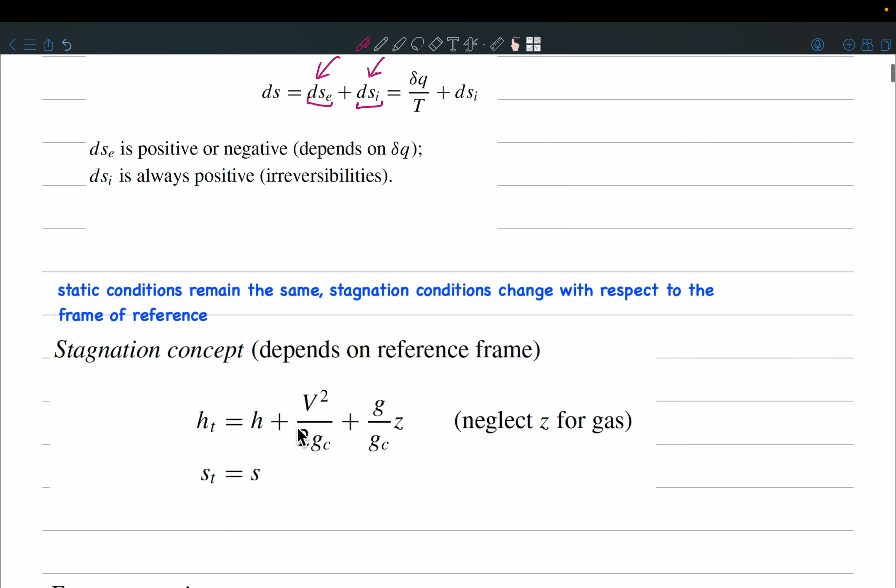Okay, so the next concept that we saw was the stagnation concept. Do you remember how the stagnation state is achieved? Can one of you please answer?

Adiabatically is enough. Yeah, and reversibly also, right? So it has to be a reversible and adiabatic process from which, starting from a static condition, if I use a reversible adiabatic process and go to what condition? What does stagnation condition mean? What is the Mach number at that stagnation condition? Zero. So you have to basically become stagnant, you have to go to Mach 0. And this is the reference state which we use to solve isentropic flows.

A very important point was that whatever frame of reference you use, the static conditions are going to remain the same, but the stagnation conditions will change depending on what frame of reference you are using. Because the stagnation enthalpy is equal to the static enthalpy plus V square by 2. Just ignore this, it's a normalization constant used in the textbook I was referring. So depending on what frame of reference you have, your stagnation enthalpy is going to change. Is this clear?

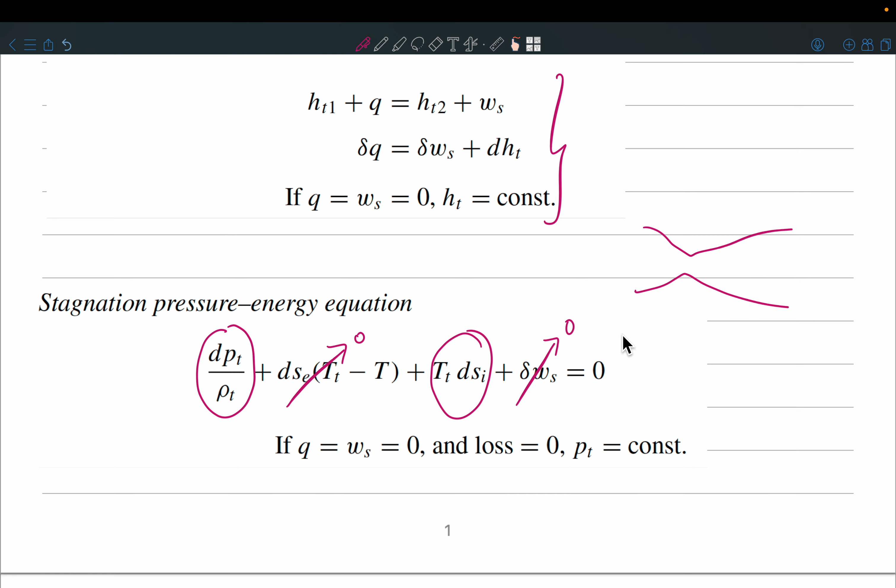Yeah, anyone can answer please. Yeah, in isentropic processes. So one example is a CD nozzle operating at first or third critical. I hope you remember the first and third critical points.

Which of these options is correct, or none of them are correct? Option A is wrong. What about option B? B is correct. So static pressure, or any static quantity for that matter, does not change whatever is your frame of reference.

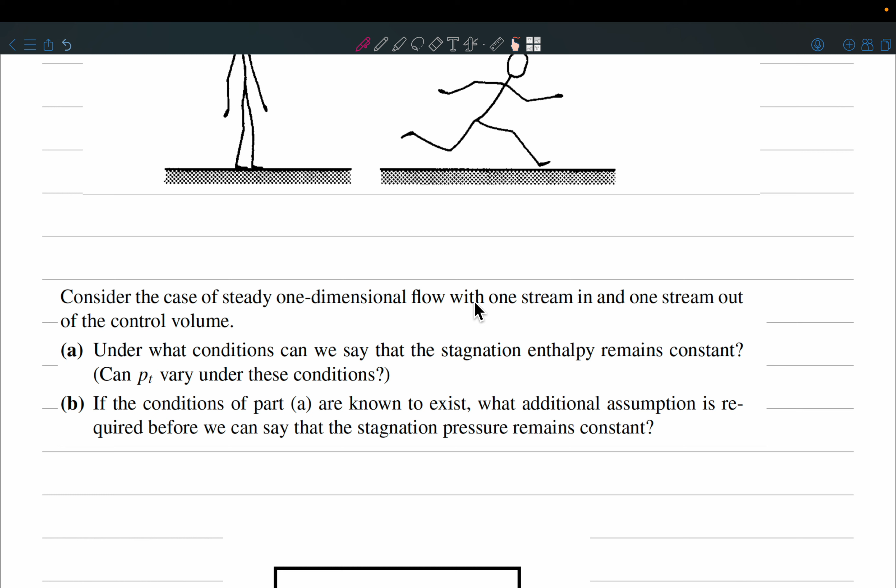So here's another question. Consider the case of a steady one-dimensional flow with one stream in and one stream out of the control volume. Under what conditions can we say that the stagnation enthalpy remains constant? We just saw this above, the stagnation enthalpy, the energy equation. So when will the stagnation enthalpy remain the same?

Q is 0, no heat added, and work also 0. And we also saw that the stagnation pressure can actually change under these conditions, and the only case where stagnation pressure will not change is when, in addition to Q equal to 0 and W equal to 0, we also need losses equal to 0.

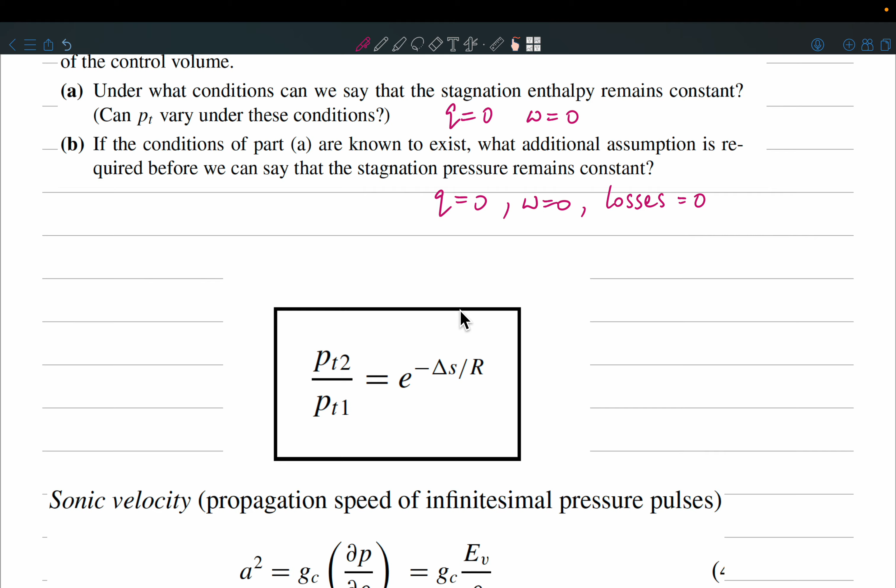And then we also saw this equation. Do you remember the relation between the stagnation pressures and entropy? What this equation says is that if there is a change in entropy, say due to losses, like we saw in the very first equation, ds equals dse plus dsi, and if dse is 0 and dsi is always positive, then delta s is positive. So e power minus delta s by r is going to be less than 1, which implies that if there are losses in the system, PT2 should be less than PT1. That means stagnation pressure will drop whenever there are losses.

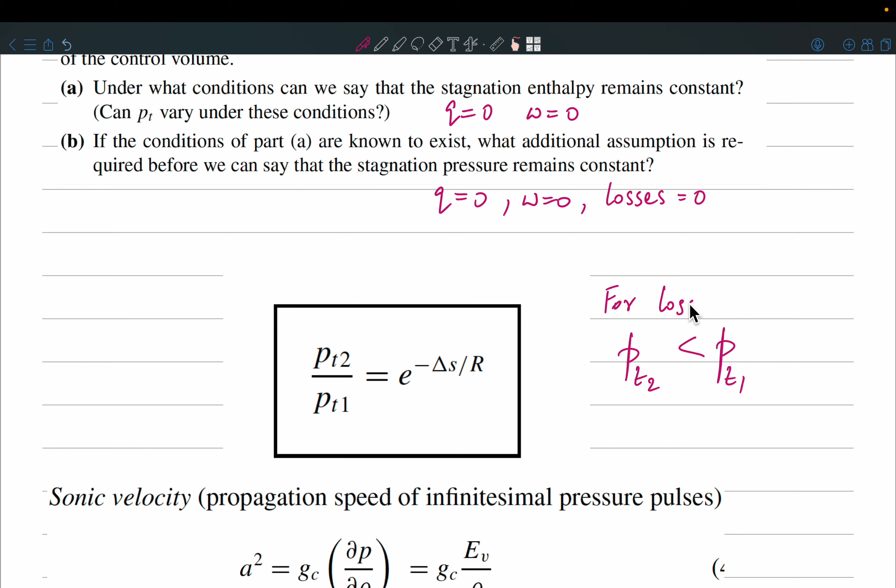And you must be familiar with these equations. How is the sonic velocity defined, and what is the Mach angle, Mach number? We have also seen these special relations for perfect gases. And when are these equations valid? Are they valid for any flow? Are these only isentropic relations? Can they be valid only in isentropic flows?

Now, give me a formula for the stagnation enthalpy or stagnation temperature in terms of the static quantity and the Mach number. So does the flow have to be essentially isentropic? Anyone? Just give me a yes or no. It's okay to be wrong.

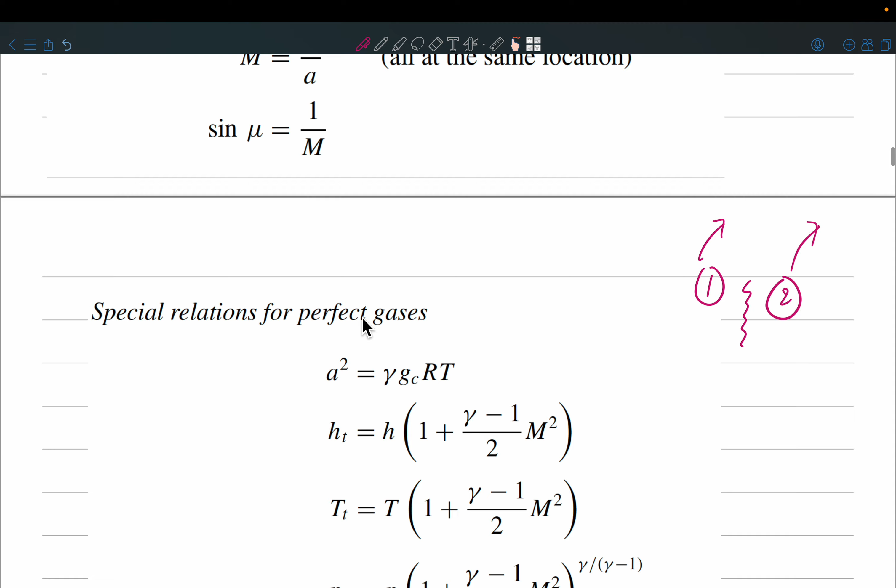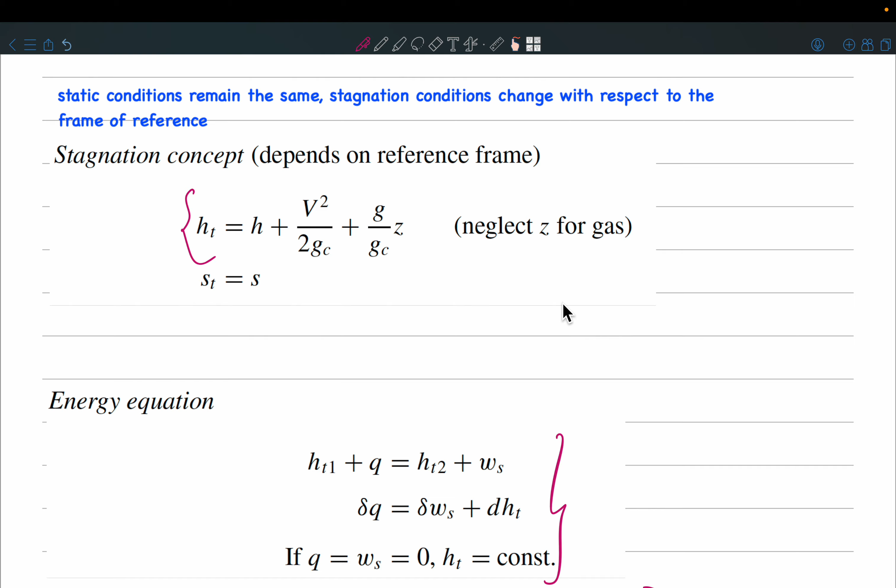So how did we get this equation? Let's go back. We derived the energy equation, and in the energy equation we said, okay, put Q equal to 0, W equal to 0. That gives me that the stagnation enthalpy is constant. But right now I am not applying any conservation equation like the energy equation. I am just defining a new state, which is the stagnation concept. Remember, stagnation enthalpy is static enthalpy plus V square by 2. If you rewrite this, you just rearrange and get this equation I've shown you here. So stagnation enthalpy can be related to the static quantity and the Mach number. I can use this in any flow.

What was the stagnation reference state? You start from some point, okay, so this is the H-S diagram, and this was your original state.

So let's say this is state 1, and from here you go through an isentropic, reversible adiabatic process, to a state 1s, or as written here, T. This I can do for any state 1. Let's say I have a normal shock, and after the normal shock I have some other condition 2. Then from 2 I can also go through an isentropic process and reach point 2T, and they will be at the same enthalpy line.

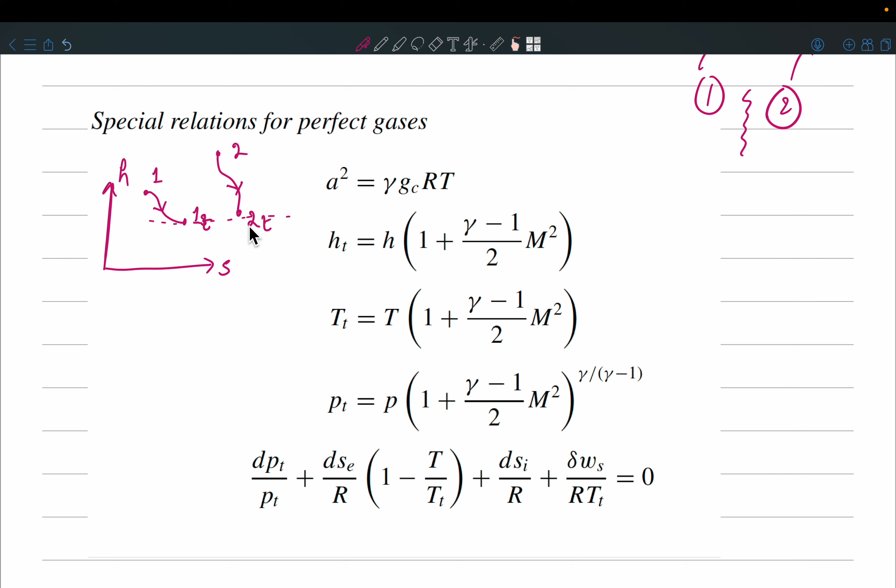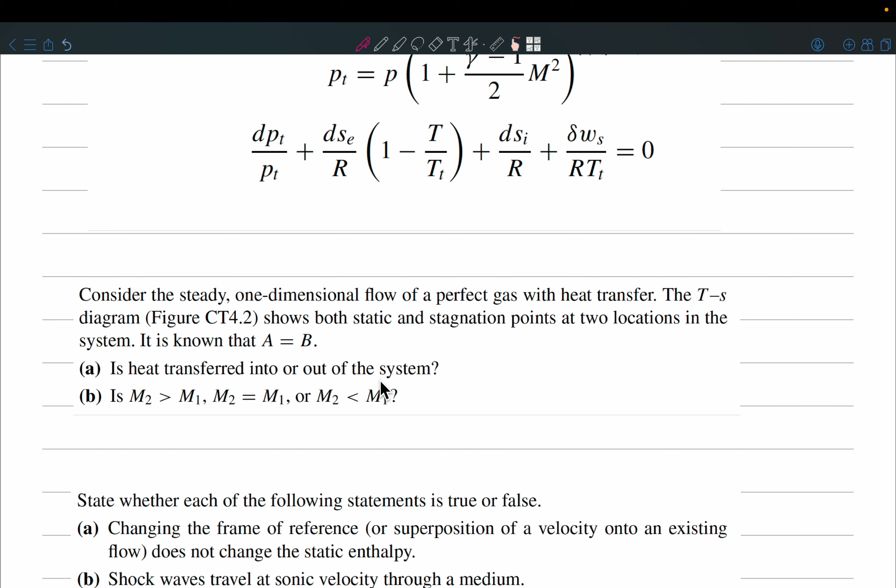Okay, so let us see this question. Consider a steady one-dimensional flow for a perfect gas. I don't have the figure here, but the TS diagram shows both static and stagnation points at 2 locations in the system.

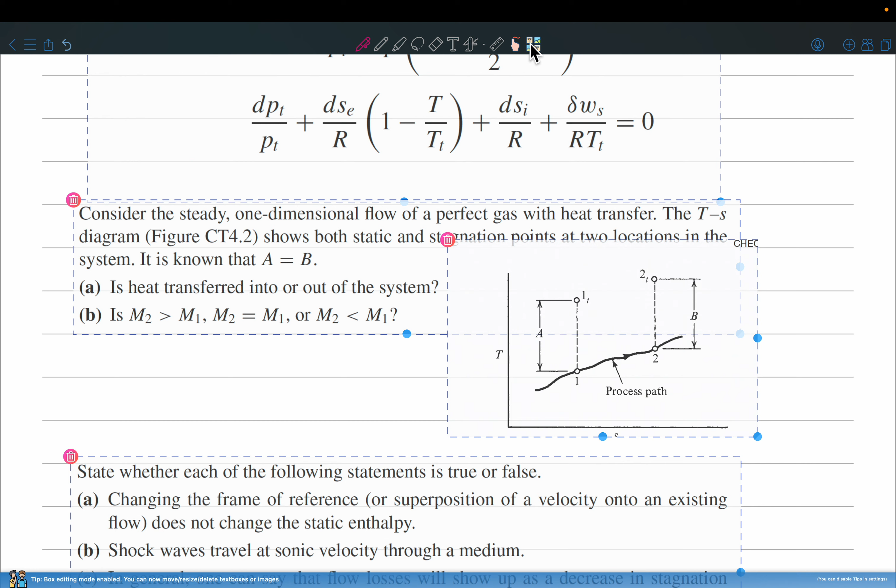So, is the heat transferred into or out of the system? How do you say this? Please answer. So you can see there is this, yes, into the system. How do you say so? Right, so the temperature has increased.

If you compare point 2 and point 1, are you comparing the static points or the stagnation points? Yeah, you should compare the stagnation points. That's very important. So here the answer is into. You should ideally compare these lines, not 1 and 2. Can you tell me why?

Another way of seeing this is, you have this case ht2 plus w. Now it is possible that heat is actually being removed but work is being done on the system, which also might change the temperature states in a different way. And we also saw Rayleigh flow where the velocity was changing - if you remember, in Rayleigh flow there is a state of maximum entropy and a state of maximum enthalpy. Between the maximum enthalpy and maximum entropy state, the temperature actually reduces despite adding heat to the system. So you can only see the stagnation quantities and infer whether the heat is being transferred into or out of the system.

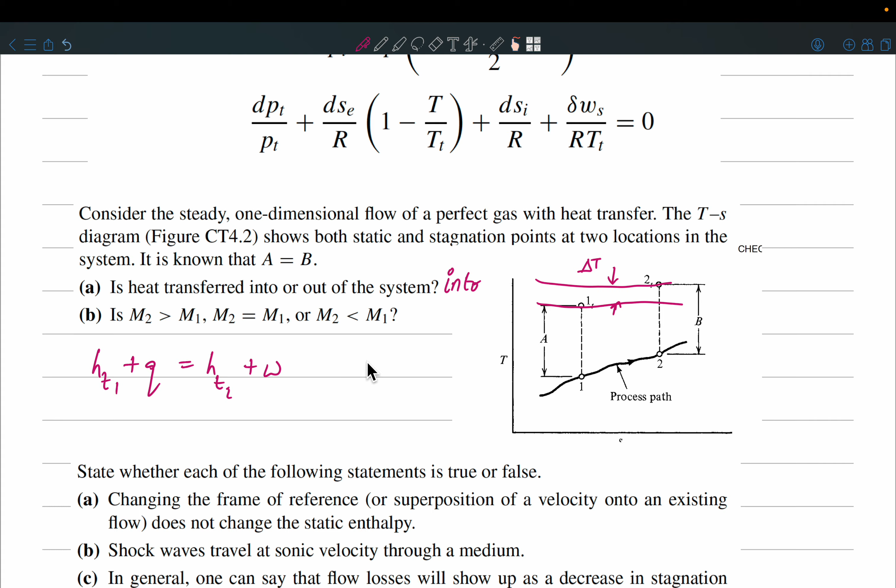Okay, so what about question B? Is M2 greater than M1, equal to, or less than M1? Why? Just think again. See, the static points given to you - for both these static conditions, this rise A and this rise B is given to be the same. How can the Mach number be the same?

Okay, you said the right thing, but think a little more. What is Mach number? What did you say? Because A is equal to B, what does that imply?

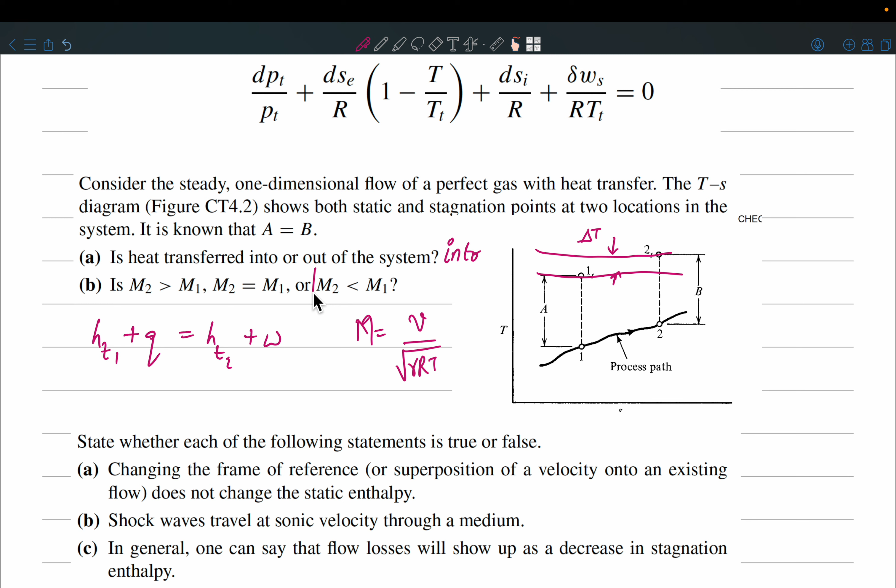Yes, m2 will be lesser than m1 because t2 is more than t1. Right? So velocity is same but not the Mach number. So be careful. Alright, okay.

Okay, so let's move on to this next set of questions. You have to state whether these questions are true or false. So, changing the frame of reference does not change the static enthalpy. Is that right? True or false? Why? Okay, we just saw that stagnation enthalpy depends on the frame of reference, not the static enthalpy.

See, whether I'm moving in a train or whether I'm sitting at my home, the temperature that I feel is going to be the same, isn't it? Yeah, so this is true.

What about part B question? Shock waves travel at sonic velocity through a medium. What are shock waves? The normal shocks that we have seen, right? And we have also solved questions on moving shock waves. So do they travel necessarily at sonic velocity through a medium?

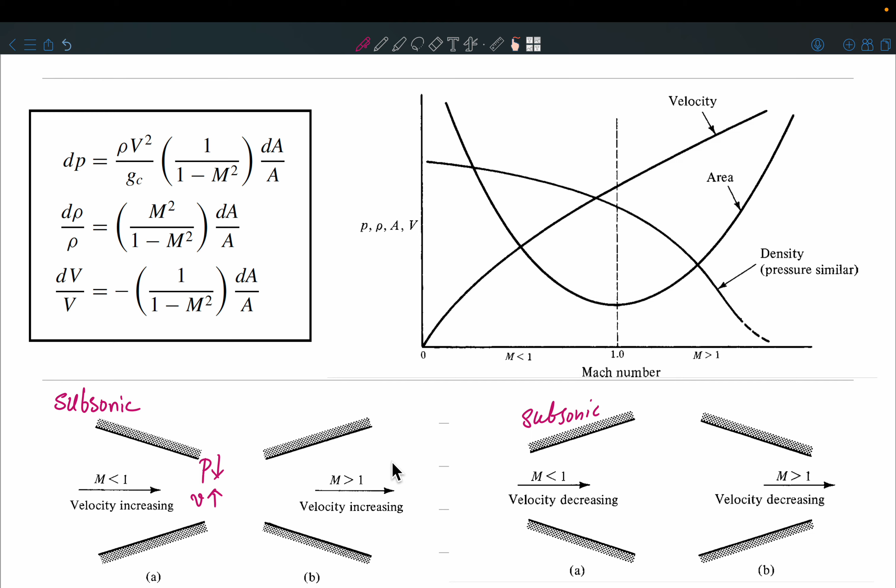So what is this going to be, a nozzle or a diffuser? Nozzle, right. And when the area is increasing for subsonic flow, then it is a diffuser, right? Okay, and for supersonic flow, it's the opposite. So when the area is increasing, you can see that velocity is going to increase. Right. So we have the nozzles and diffusers for subsonic and supersonic flow.

Okay, now there is another reference state that we have studied, which is called the star reference state. And how did we achieve the star reference state? It is similar to the stagnation state, because you start from whatever point you are at, and then you achieve a state by a reversible isentropic imaginary process, and you achieve Mach equal to 1. In stagnation, again it's reversible isentropic, but you achieve Mach equal to 0. And here it's reversible isentropic, but you achieve Mach equal to 1. So I hope you understand what is a star reference state.

Alright, now if I start from two different static conditions, will the star reference state be same or different? Different, yeah, say it confidently.

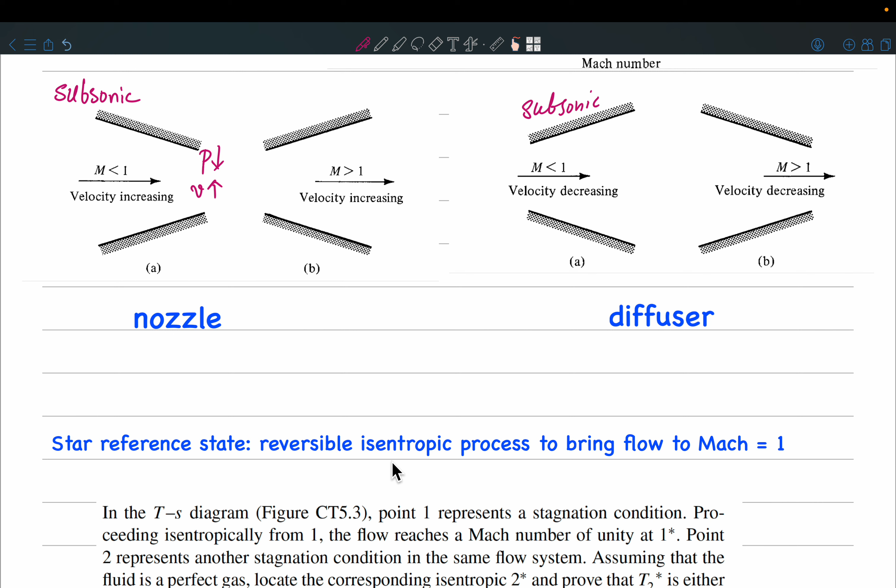So this is important. We'll come back to this when we see Rayleigh and Fanno flow. You will see that for Rayleigh and Fanno flow, the way you define the star reference state, it is going to be the same no matter what initial condition you start with.

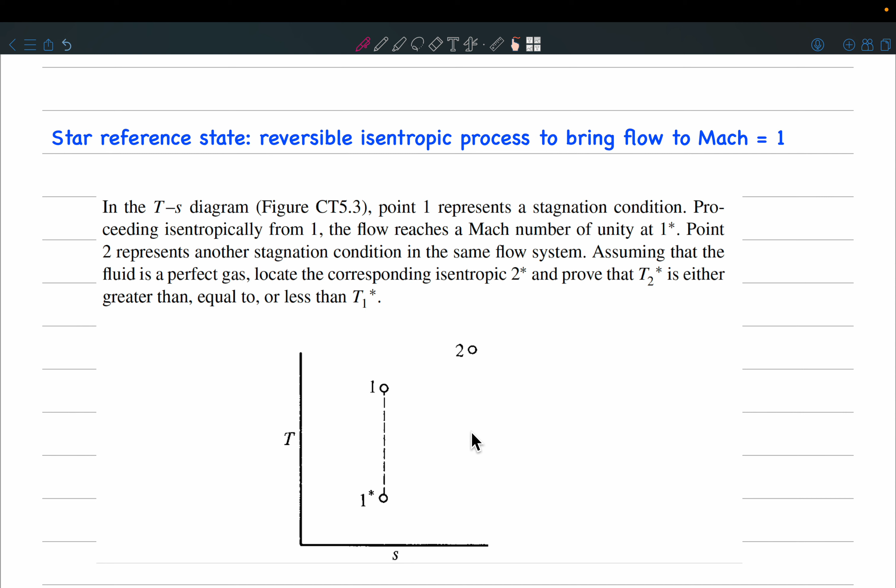Okay, so in this question, in the TS diagram which is given, point 1 represents a stagnation condition. Proceeding isentropically from 1, the flow reaches a Mach number of unity at 1 star. Point 2 represents another stagnation condition in the same flow system. Now assuming that the fluid is a perfect gas, you have to locate the corresponding isentropic 2 star and also prove that T2 star is either greater than, equal to, or less than T1 star. You have to tell me whether T2 star I should mark it above this line or below or at the same point.

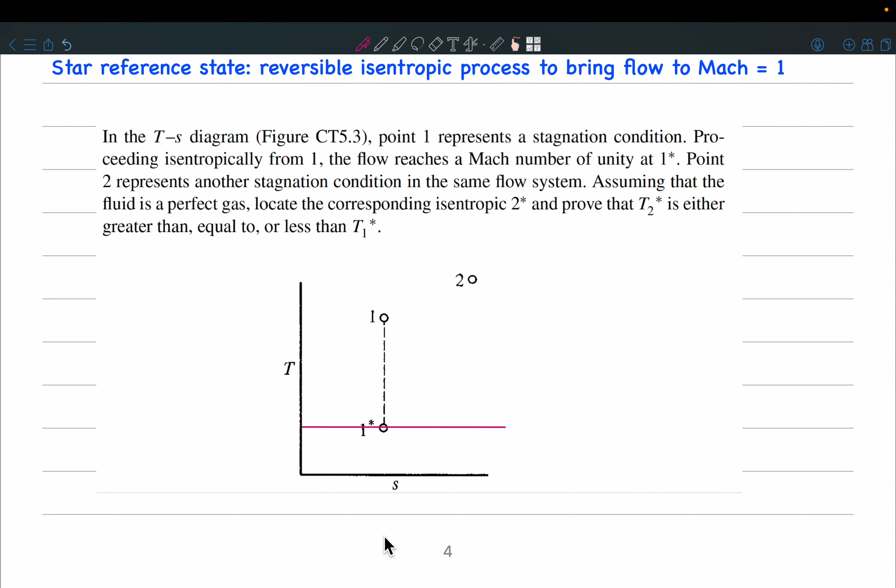So how do you do this question? Did you understand the question? So we just now discussed, if we start at two different stagnation states and then we achieve the star reference state, you said that the star reference states are going to be different, right? So we know that T2 star is definitely not equal to T1 star. So this we have already established. So now the question is whether it's greater than or less than. Why? How?

Okay, first of all, you are saying greater than. So let's say it's here, right? So should I mark 2 star over here, here, or here? A, B, or C? Right, yeah, so it has to be isentropic, so it has to be a straight line like this, right? So definitely it's B. So now the question is, you said T2 star should be more than T1 star. Why?

Why? Yeah, go on. Who answered it? Just tell me what is your reasoning. Sorry, I did not get you. Can you repeat? Stagnation temperature is?

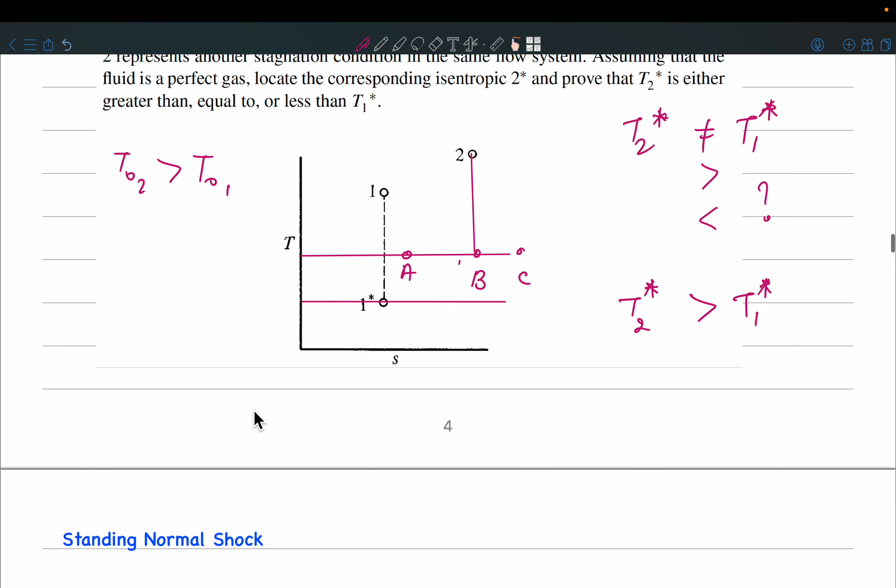You're saying that T02 is greater than T01, and that is why T2 star is greater than T1 star. Yeah, right. Yeah, that is correct. Okay. Any questions about this, or should I move on?

Okay, yeah, thanks. So we saw the conditions for standing normal shock, and these are the equations we have derived. This is from the continuity equation, then energy equation, and the momentum equation. So what do we understand? What are the quantities that are conserved across a normal shock?

What are the... T naught, H naught, is okay, essentially the same thing, fine. And what else? Yeah, so stagnation temperature or stagnation enthalpy, H naught, remains the same.

What about P naught? P naught decreases, okay, so P naught doesn't remain the same. And what else remains the same across a normal shock? You can see the equations here.

Yeah, go on. So how do you derive the continuity equation? You say that the mass flow rate is going to remain the same, isn't it? Yeah, so the mass flow rate remains the same, mass conservation, and then you have this P plus rho V square. This quantity remains the same. Okay.

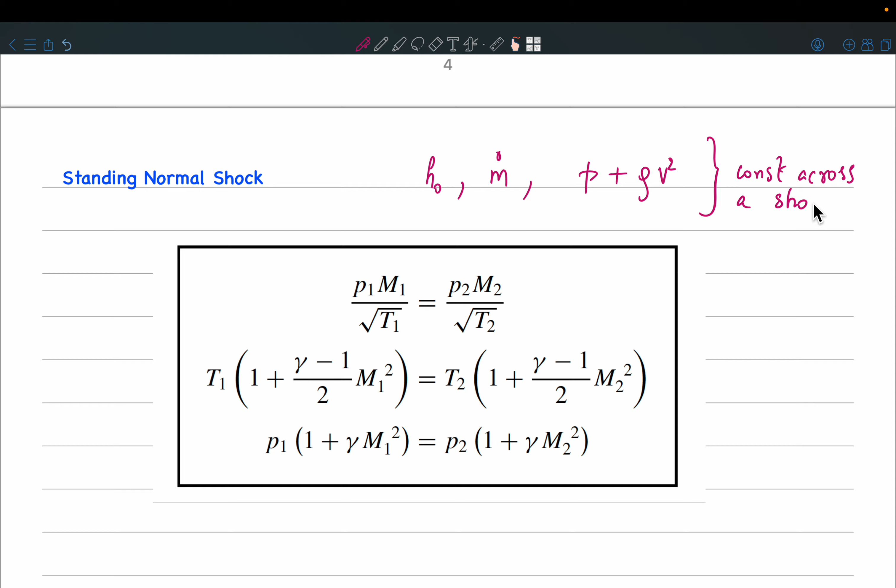Then we also saw CD nozzles, and this is the diagram that we've discussed several times. So can you tell me what is the Venturi regime? What happens in the Venturi regime? And if a CD nozzle is operating in the Venturi regime, which gas tables would you use, or which equations would you use?

Come on, we've solved questions with this. Anyone answers? Yeah, it's a subsonic regime. So the flow is going to remain subsonic in the converging and the diverging part of the nozzle. And which equations would you use, or which gas table would you refer to?

Isentropic gas tables, right? And what happens at the first critical? What happens in the nozzle? In the first critical situation, will a shock be formed? So will you use the shock tables to solve the first critical, or the isentropic table?

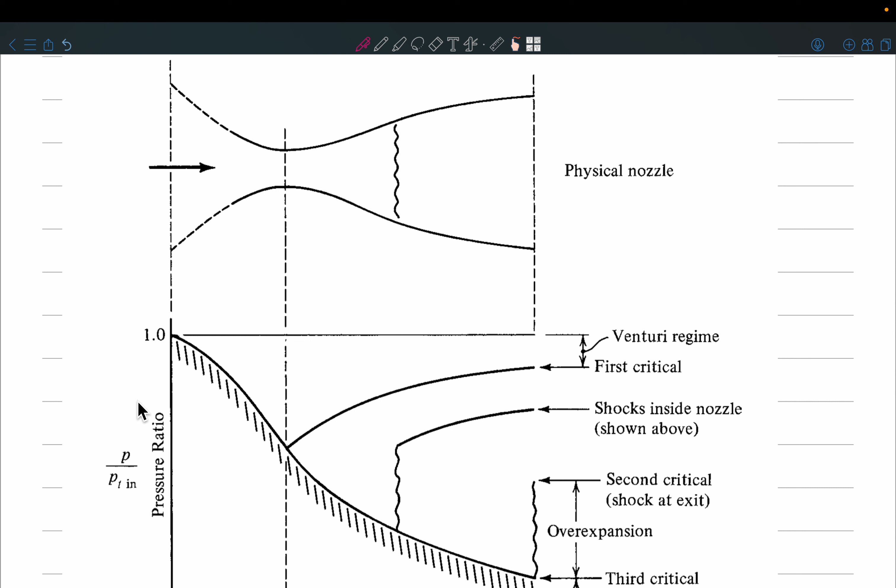See, on the left hand side, you can see what you've plotted is the pressure ratio, right? And what this pressure ratio tells you is, in a physical system, what you can change is either you can change the pressure here, which is the chamber pressure, or you can change the pressure here at the receiver end.

Okay, now let us say I'm using this receiver pressure and I have fixed my pressure ratio at this point. Then I have ensured that the flow is going to be subsonic throughout. As I keep decreasing the pressure, the flow conditions are going to change.

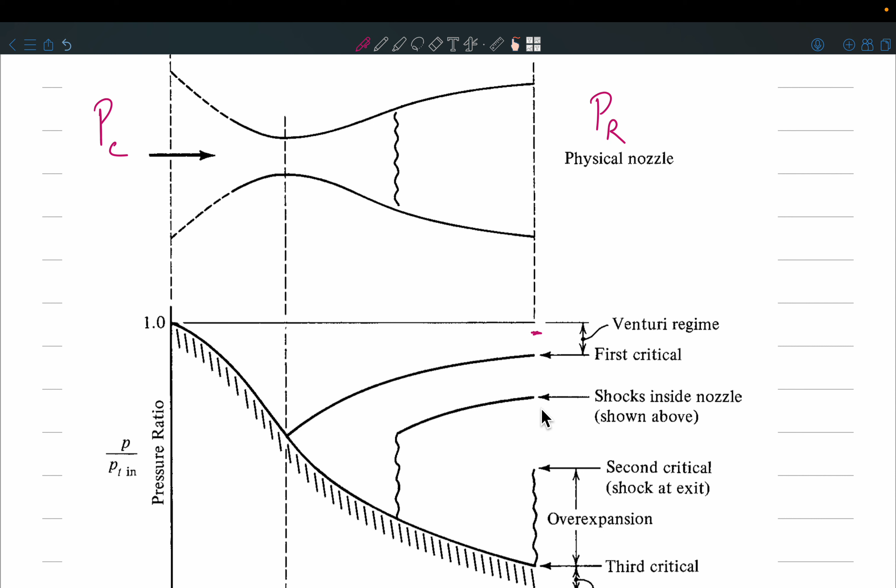Why is this happening? Why does a shock even occur? Or why do we get supersonic flow? Because the flow is forced to behave in a certain manner depending on what pressures you have applied across the CD nozzle, right? So now when you decrease the receiver pressure starting from this point, you cannot immediately come to the third critical. If you are eventually decreasing, you will first get shocks at different locations. Is this concept clear?

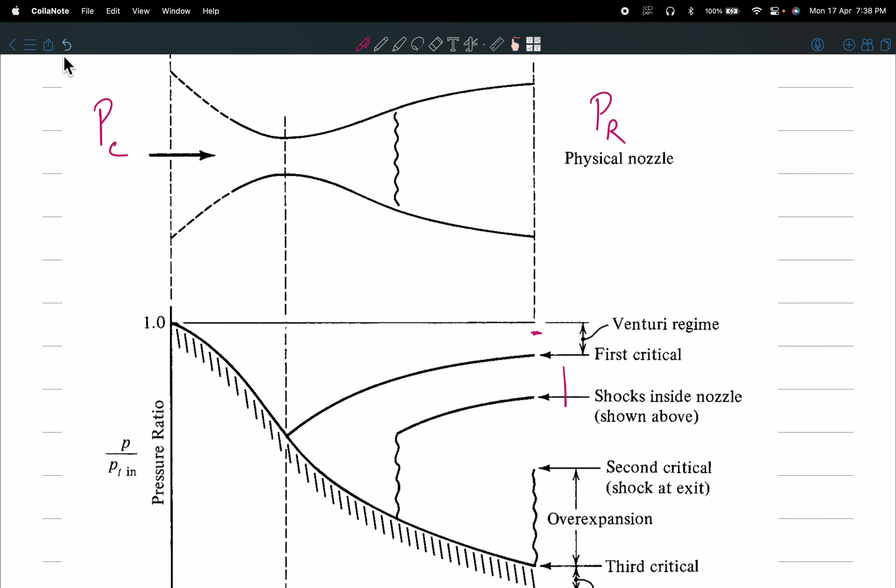Alright, so that is why you should remember, see, first you started with the Venturi regime. Anyways, the flow was subsonic in the converging section. And then you went beyond the first critical, which is where you start getting shocks. But the flow is still subsonic in the converging section. Okay, so don't get confused about that.

Alright, and can you tell me what is the second critical condition? So we have the first critical condition where the flow remains subsonic throughout the CD nozzle. Third critical, where we have supersonic flow in the diverging section, and what is most important is that it is isentropic.

Okay, now can you describe the second critical? It's written here, shock at exit, but can you describe more? What can I say about the flow inside the CD nozzle? Just before the shock.

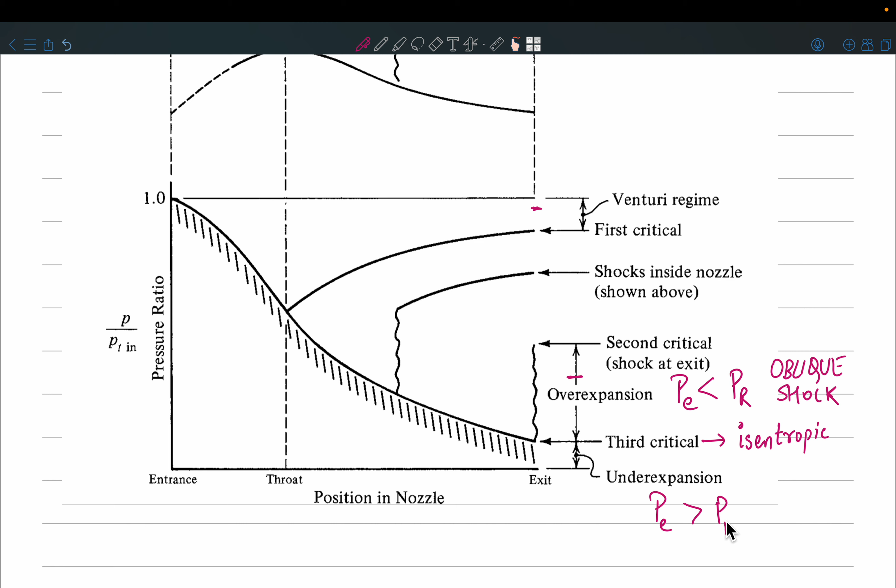So I think the most important takeaway point is that these pressures, or the pressure ratio, is the control parameter. So practically, if you have to create any of these flows, you should know how to control the pressures.

Okay, so let's answer these questions. You have to fill in the following blanks with increases, decreases, or remains constant. So what happens across a standing normal shock for the temperature?

Sorry? No, what is written? Temperature. It increases.

Okay, what about stagnation pressure? Alright, yeah. And velocity? Right. And density? Right, because it's a compression phenomenon.

Okay, so there's a question here, but I think it's very easy for you to solve. Let's consider a converging diverging nozzle with an area ratio of 3, and you have to assume that operation is happening with a perfect gas, gamma 1.4.

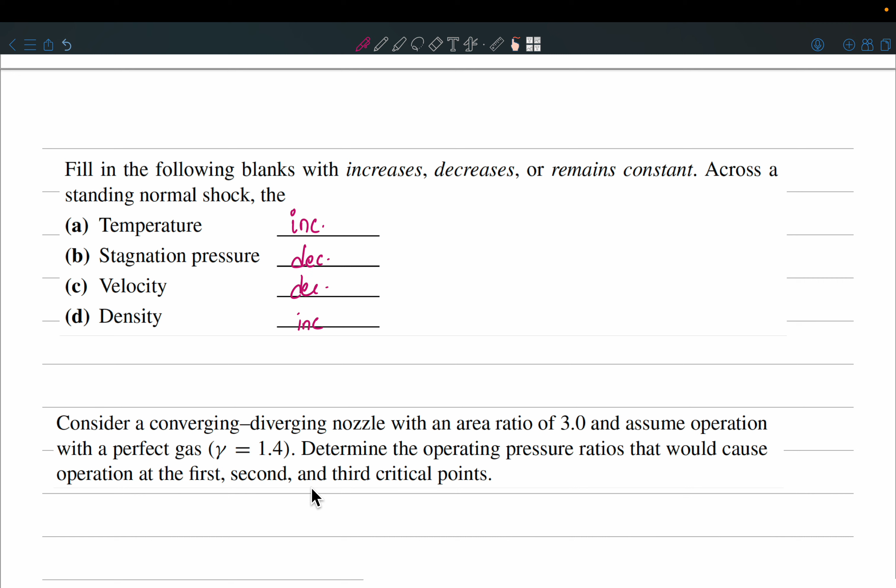Determine the pressure ratios that would cause operation at the first, second and third critical points. So we have discussed the first, second and third critical points, and like I said, the pressure ratio determines which state is achieved in the CD nozzle, right? So for this given area ratio, without giving the answer, how will you approach this problem? How will you tell me the pressure ratio for the first critical point?

Anyone? Actually, we have solved one of this type of question in the tutorials as well.

Okay, are you all still there? Yeah, please tell me, how will you find the pressure ratio corresponding to the first critical point? No idea?

Okay, someone was trying to speak something. Alright, we have a lot more things to go through, so please answer quickly. And also the static pressure ratio. But anyways, how do you do it?

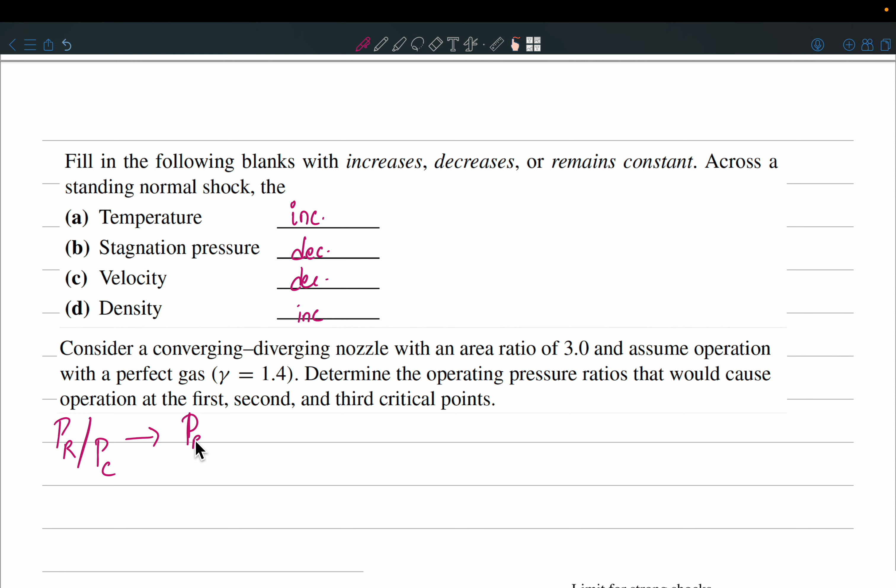So in your case, it is the P receiver by P naught. Give me the reciprocal.

Yeah, that is right. So for the first critical, it's 0.97. And what about the third critical?

And how did you do this? Did you use the gas tables or did you use a formula? Isentropic table, yeah.

So corresponding to this area ratio, you must have got a subsonic Mach number, and corresponding to that, you have this pressure ratio. Similarly, you will have a supersonic Mach number, and corresponding to that, what is the pressure ratio?

In the isentropic table, what is not given? Okay, did you find the Mach number? That is the subsonic Mach number. What about the supersonic Mach number?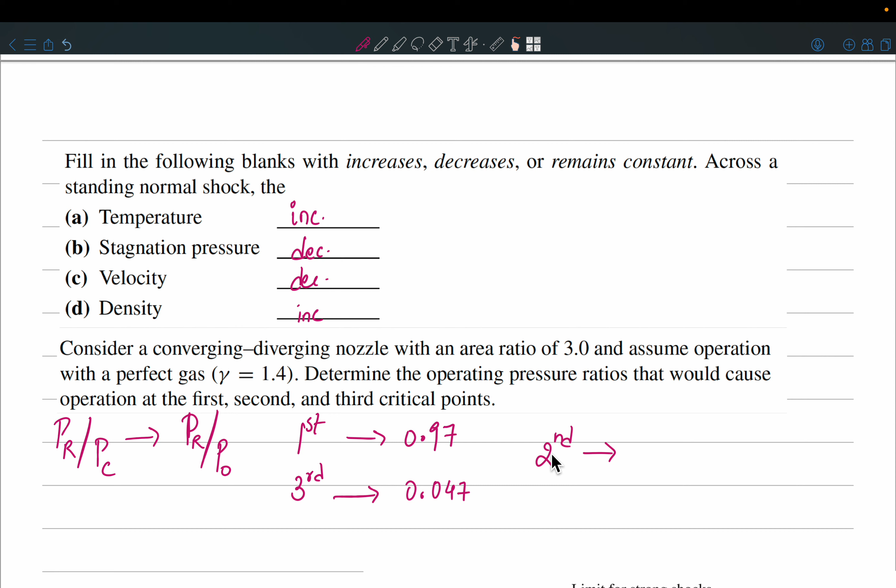Okay, so this is why it was important to know what happens inside the CD nozzle just before the shock.

So you just now found what is the Mach number for the third critical? Can you tell me? It was 2.65. Yeah, okay, so this is the Mach number corresponding to the third critical.

Now what is happening at second critical? So everything is exactly the same as third critical. So up till this point, just before the shock, you should have the Mach number whatever you found, 2.65, right? So I can call this M1, and you also have the pressure value, the pressure ratio up till here.

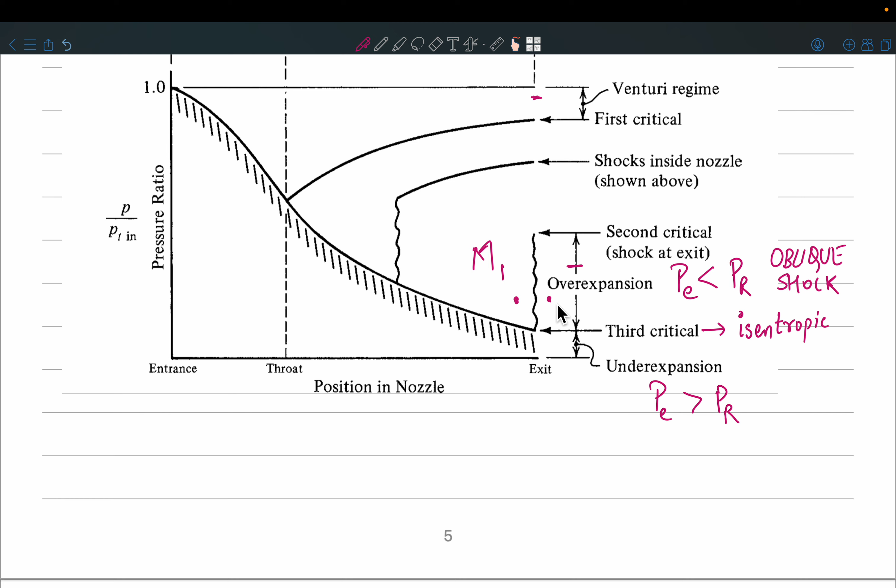And after this, you have to use the normal shock table to find the pressure ratio across the shock, and then you can tell me the pressure ratio between the receiver and the chamber. So how do you do this?

You will have to give me the receiver pressure ratio by the chamber pressure, which is going to be the receiver pressure P2 by P1 multiplied by P1 by P0, and P1 by P0 you just now found is 0.047. Did you understand what I'm doing?

Yeah, so can you tell me now the final pressure ratio? You know the Mach number, use the normal shock table, find P2 by P1, multiply it by this value and tell me PR by PC.

0.37. Just check your calculation again. What is P2 by P1?

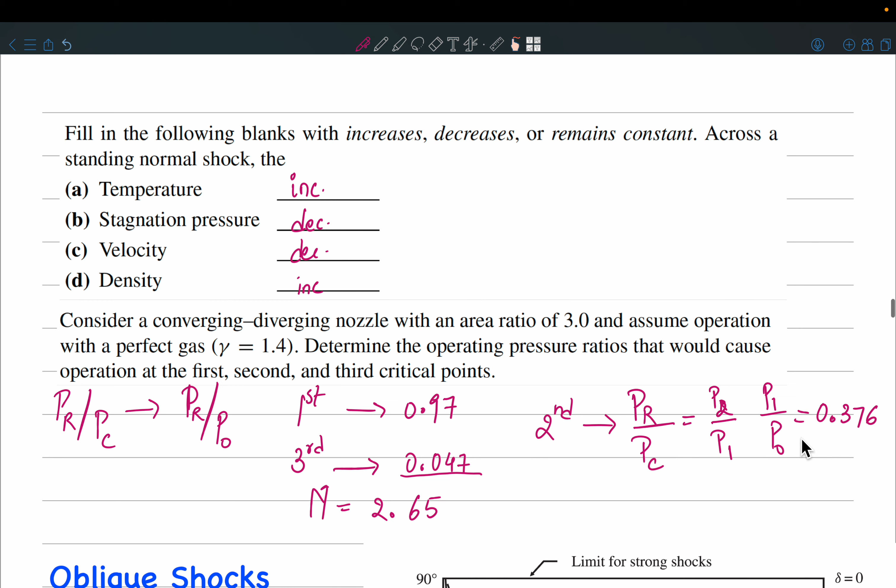Okay, so let's move on to oblique shocks. So in oblique shocks, we've seen whenever the flow is forced to turn into itself - here you are forcing the flow to actually turn its direction. It was moving horizontal, but now it has to deviate by an angle delta. So a shock is going to get created, an oblique shock.

Okay, and the shock angle is what the shock makes with the horizontal, right? Or not the horizontal - it is the angle that the shock makes with the direction of the initial flow.

Okay, so here you can see this chart between the shock angle and the entering Mach number, and I hope you are familiar with the fact that there can be two shocks created. One can be a weak shock, one can be a strong shock corresponding to each Mach number.

So is this known, or do I explain this in detail? Any questions? Okay, yeah, this is covered in theory.

So now my question to you is, let's say a deviation angle is given - let's say this delta equal to constant, this particular line is chosen. Okay, and this is the Mach number that I'm looking at. So both these shocks are possible, strong and weak. Which one will actually occur? How do you know that? Why can't the strong one occur?

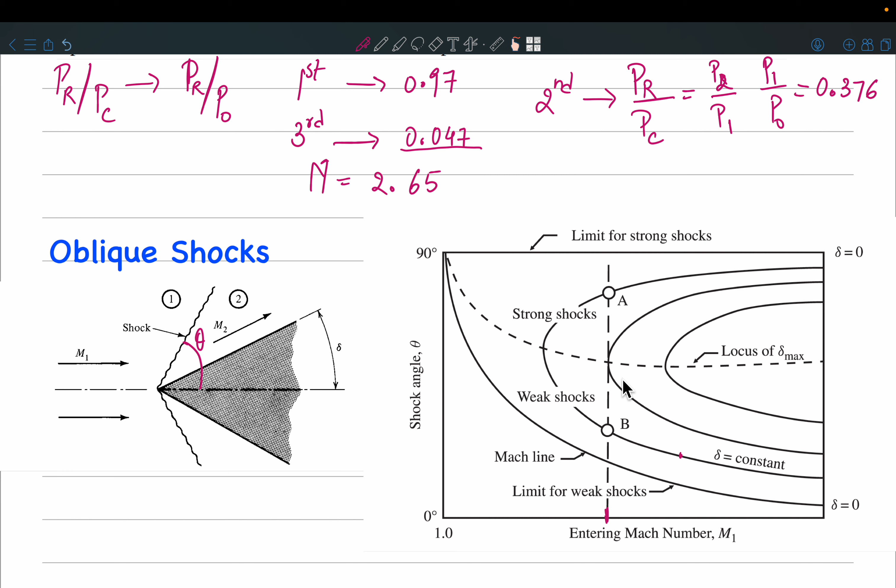Yeah, so we can say that most of the time, most frequently, weak shocks will occur, right? But sometimes strong shocks can occur depending on the boundary conditions.

Yeah, you were saying something? Right, but I don't exactly know in the question what were the conditions given.

Okay, okay, so naturally, yeah, it is weak shocks. Okay, maybe it was a problem in the question. Alright, but you know the concept, right? So it's okay.

So, like you said, it depends on the boundary conditions whether the strong shock will occur or the weak shock, but most frequently we will get weak shocks. Boundary condition, like one of your friends suggested, that if we have to get a strong shock, you have to either change the pressure or the pressure ratios across the shock, right?

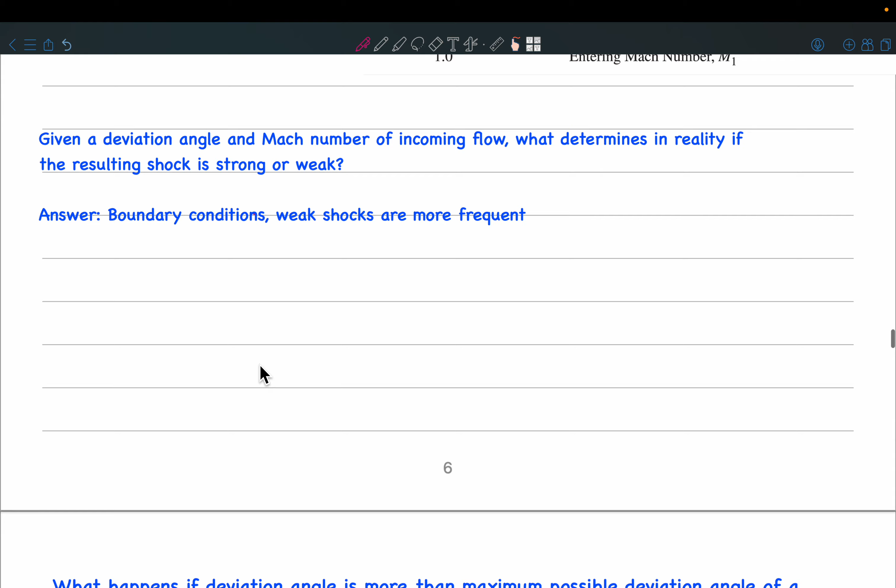Can you repeat? Your voice is breaking. Yeah. Yeah.

Let's apply this concept of strong shock, weak shock directly to a re-entry vehicle. Firstly, if you have seen the design of a re-entry vehicle, it's not sharp edged. So you don't expect an oblique shock, you expect a bow shock.

Okay, and now to specifically answer your question about a detached bow shock, whether it's strong or weak, you tell me, what about a bow shock? Is it strong or weak?

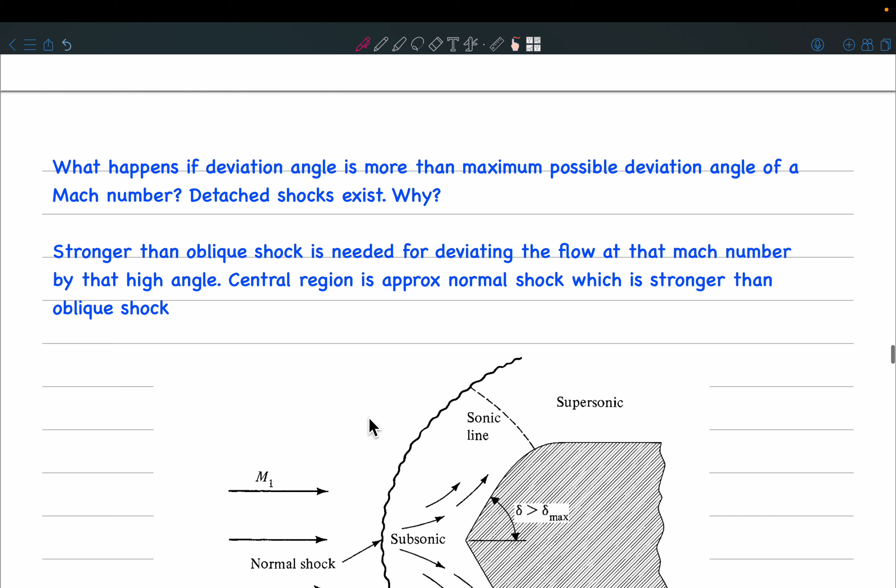Yes, exactly. So that's what I was coming to next. What happens if the deviation angle is more than the maximum possible angle? If you go back to this diagram, let us consider this particular line, okay?

So in this particular line, there is a particular Mach number. So at this Mach number and this value of the deviation angle, I can have an oblique shock.

This is the delta max. But what if I change the deviation angle beyond the maximum possible deviation? For a given Mach number, I have a well-defined delta max, the maximum deviation angle. But now you have shaped this body such that the deviation is much more than this delta max.

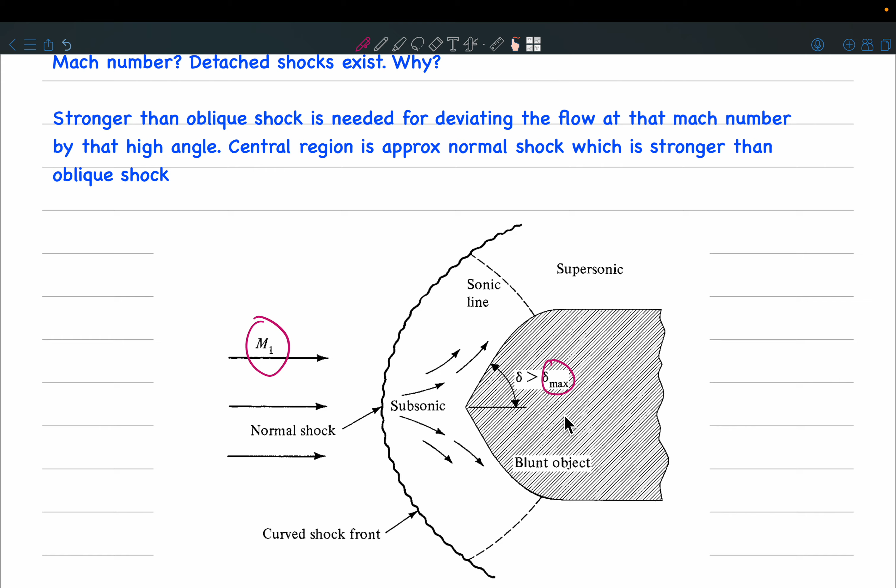So now you cannot get an oblique shock. There is no solution on your shock angle chart. So what you will get is a detached shock. And this detached shock or bow shock, you can treat like a normal shock towards the center. So it is very, very strong.

Okay, this is clear, right? I think you all must be knowing this. Yeah, and in the central region you can treat it as a normal shock, but as you move away from the central region, the strength of the shock is going to continuously change.

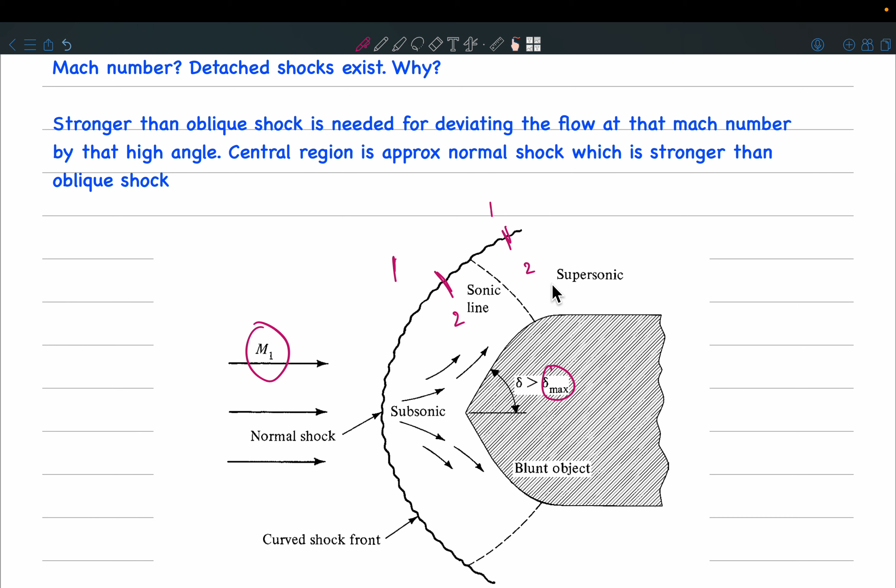And then there is a sonic line here. So over here the shock is strong enough so that the supersonic flow on this side is going to convert to a subsonic flow on this side. But here the shocks are weaker and you will get supersonic flows on this side, right? Okay.

So if an oblique shock is broken down, this is a different question - this is on oblique shocks, not on bow shocks. If an oblique shock is broken down into components that are normal and tangent to the wavefront, what can we say about the normal Mach number or the tangential Mach number? Does it increase, decrease, remain constant?

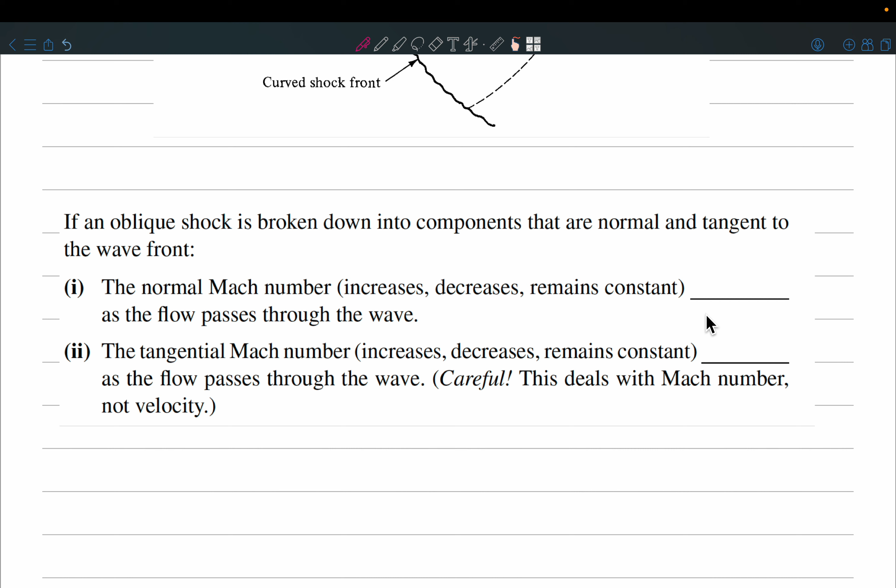Okay, normal Mach number changes, but increases or decreases? It decreases, right? Yeah, okay. I mean, what is normal Mach number? Imagine it was a normal shock. Obviously, Mach number is going to decrease.

Fine. What did you say for option 2? It remains same. Okay, see, look at the question - it says be careful, this deals with Mach number and not the velocity. Okay, the answer you're giving is 'decreases' - why?

Right. Tangential velocity is constant. And what about the static temperature? What happens to it? Static temperature is increasing, so the sonic speed is increasing. So then the Mach number is supposed to decrease in the tangential direction also.

Okay, so the next thing we saw was Prandtl-Meyer flows. You can see these derivations in theory, but the crux of the matter is if the shock is very, very weak and the flow is deviated by a very small angle delta, you can derive equations which say that the pressure jump across the weak shock is proportional to delta, and the entropy jump across that weak shock is proportional to delta cubed. This equation is valid when delta is small.

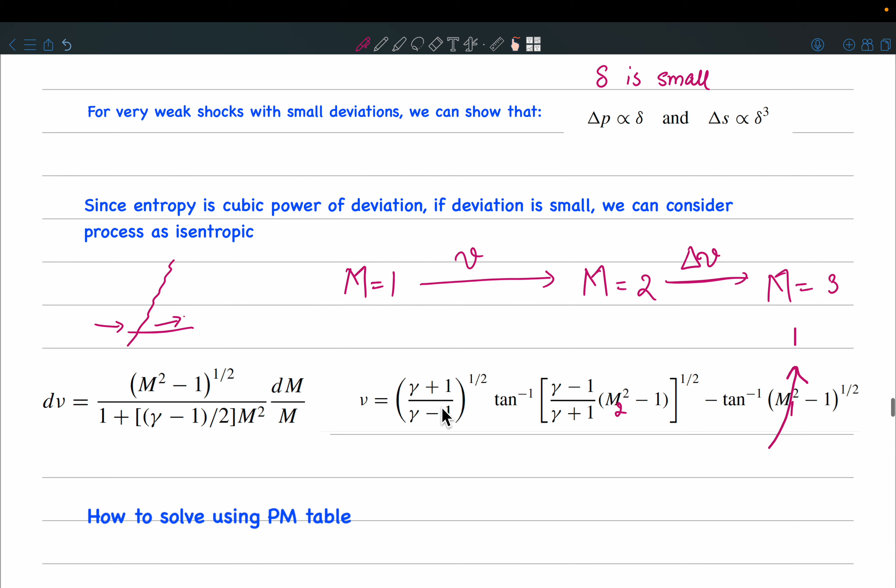Or the other way around is you start with m equal to 1, and you ask yourself, by how much do I need to turn the flow so that I achieve Mach number 2.06, and you will find that the answer is 28 degrees. So you say from Mach 1 I turn by 28 degrees, so I get Mach 2.06, and then I know that I have to turn it by another 12 degrees. But if I were to start from Mach 1, and turn by a total angle of 28 plus 12, which is 40 degrees, what is the Mach number that I would get? And then you refer this value from the Prandtl-Meyer table.

Okay, so can you tell me the answer? Is this concept clear, or is there any doubt about how you use the Prandtl-Meyer table? So how do you usually solve these questions? Do you not use the Prandtl-Meyer table? Okay, yeah, so right now what you have is the Prandtl-Meyer table. So tell me the answer.

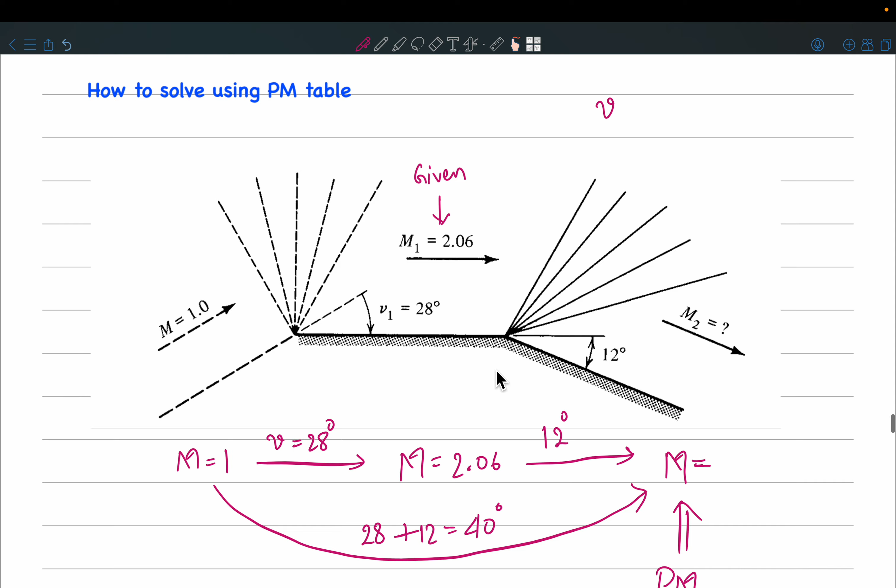Okay, so now go and see for turning angle 40 degrees, what is the Mach number given. See, it is very important that you learn to use these gas tables. That explains you the utility of making these gas tables in the first place, because otherwise you will have to solve this huge equation.

Okay, fine. So I'll leave this for you to do later, but I'll give you the answer. It's 2.54. Okay, but I mean, I understand that in NPTEL exams you're given the relevant set of values or relevant information, but you should also know how to look into the gas tables. Okay, it's very important. Yeah.

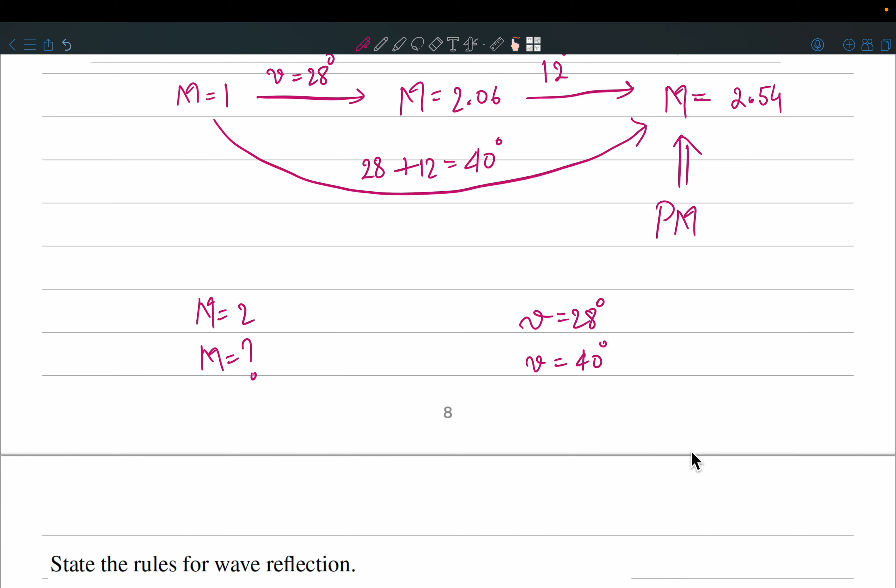Okay, so maybe you have a different version of the isentropic table. Okay. Yeah.

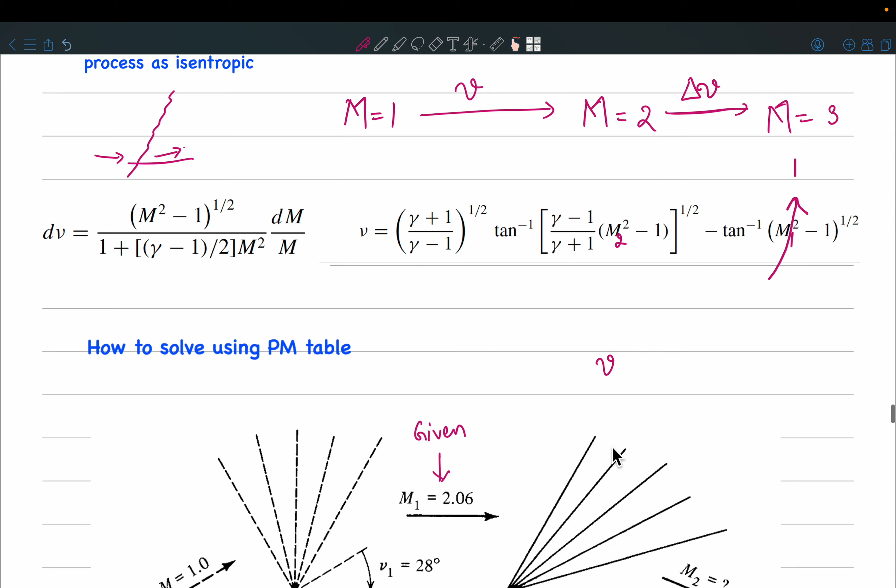No, so the reason why you expect the answers to match, you're saying that if I turn first by 28 and then by 12, the answer should be different from turning directly by 40 because of frictional effects. But what you assume here is that, this is an expansion fan, but what is an expansion fan made of? Each of these lines are actually Mach lines.

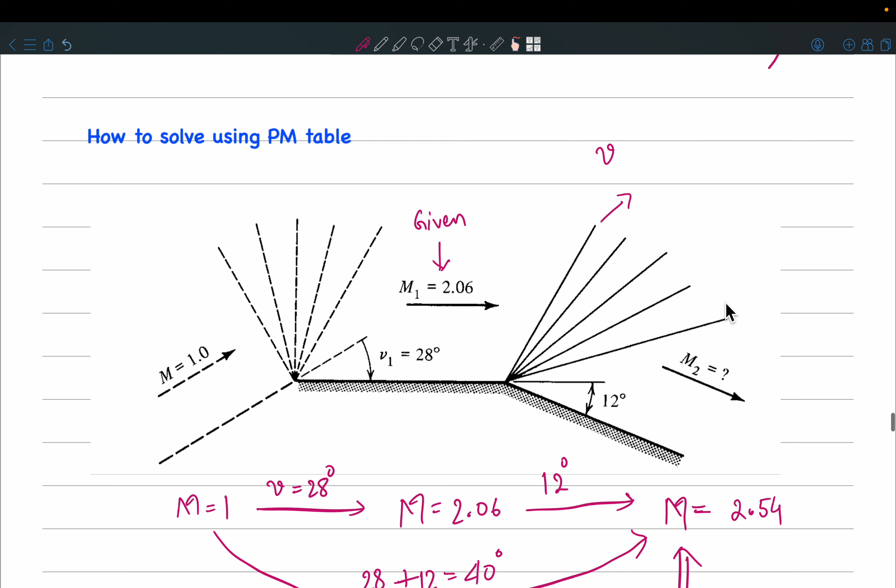The assumption boils back to this, that delta S is approximately a cubic function of the deviation, and the deviation is very small. Now what you're challenging is not this method of calculation, but this assumption. Can I even assume that delta S is small? Is it small enough?

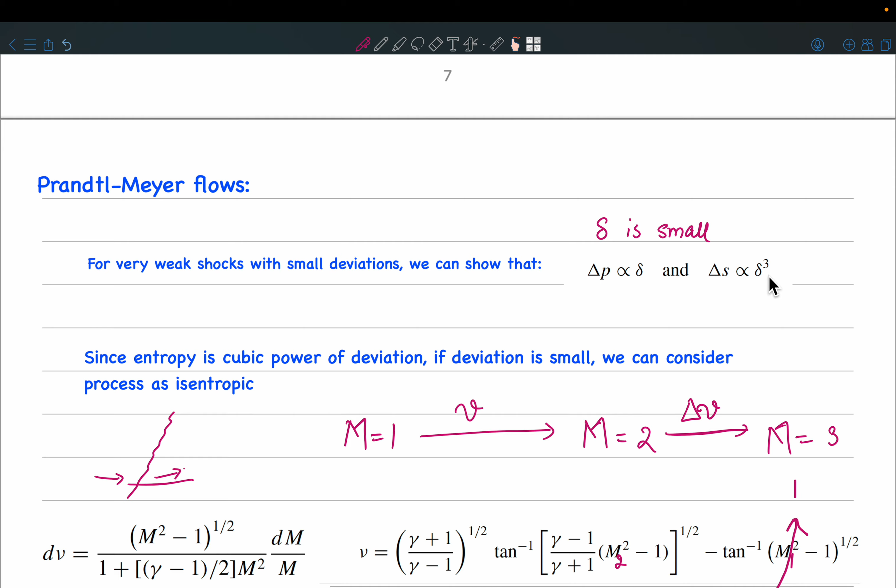That is what you are asking. So then you have to check your experimental conditions, if the deviations are small or if the frictional effects are significant or not. But usually, from experiments that I have done in my lab, for expansion fans, you can trust the gas tables. Shocks, not so much.

But then I've done some simple experiments which we do here in our course. Yeah,

Sure, okay. Now we solved certain type of questions in the tutorials. We solved this one question if you've seen the YouTube videos or attended that lecture, so there was this reflection problem.

An oblique shock was incident on this physical boundary. So there is a wall over here, and then it reflects. So this is a type of reflection from the physical boundary, and the other type you can see here is reflection from a free boundary. So are you aware of this free boundary concept?

Yeah, why are these free boundaries created? Exposure to atmospheric conditions. Okay. Yeah, so these boundaries are created. Yes, go ahead.

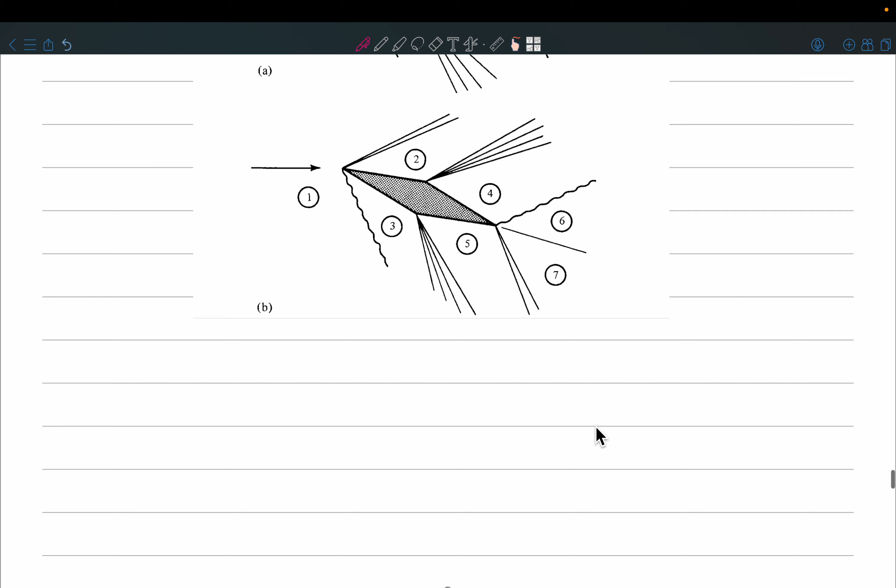So you are saying that across the boundary the pressures are different? Okay, so I have this question also. Let's do this before the previous question.

So it says, I have an ambient pressure, okay? I have some ambient pressure, say receiver pressure PR. So you have to tell me about PA, PB, PC, PD and PE and so on. Okay, and what is given here, this is, as you can see, it is an

Okay, let's assume this is an oblique shock over-expansion case. So let's start with oblique shock, and then this oblique shock is going to turn into an expansion fan, like you could see here.

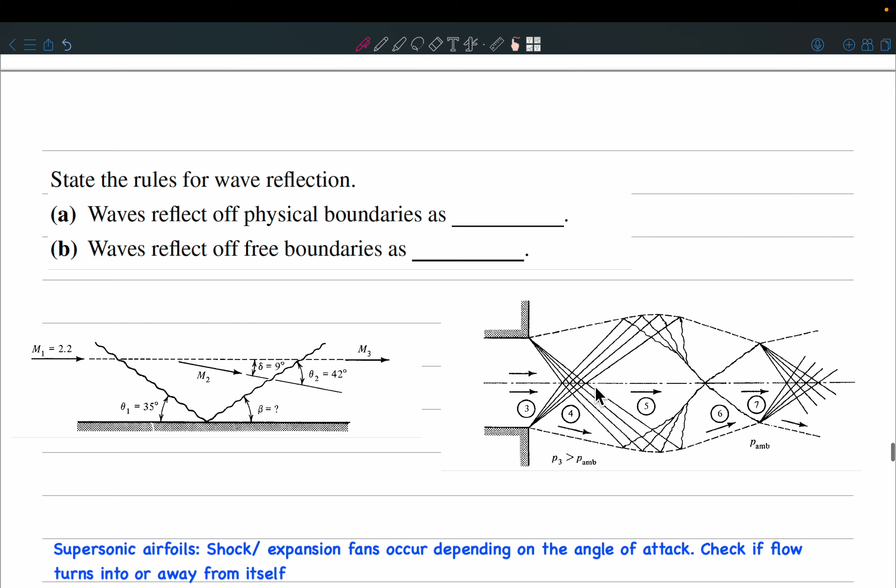Can you tell me what happens? What about PA? Is PA more than PR or less than PR? Over expansion case. You answered before, it's the same question. PA is less than PR.

Oh yeah, over expansion. And what about PB? So the oblique shock is created so that A jumps to B, and how much jump? Sorry? PB, it's an oblique shock. How can PB be more than PA? Yeah, but is it equal to PR or less than PR?

Same question. So you have this free boundary here. What happens to the pressures on either side of the boundary? Why is this boundary being created? Okay, why will the oblique shock occur? What is the purpose of this oblique shock occurring?

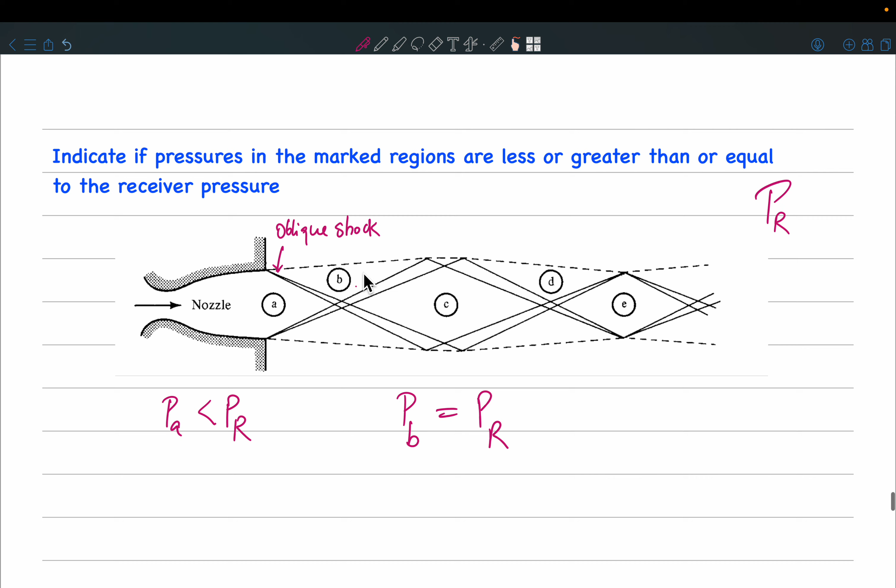And then if you compare, let me draw an oblique shock. Now, this was an oblique shock, okay? And this was the other oblique shock. Now, this was A and B. Okay, so across this pressure jumped. But again across this pressure will jump. And now what will happen?

PC will be more than PR. But that is not acceptable. So then what will happen now? An expansion fan will be created. Are you following this? Yeah, so now in this region C, an expansion fan is going to be created.

And then you will get this region D. So what is the purpose of this expansion fan? To reduce the pressure, right? And again match the ambient condition. So again what do I have? PD is equal to PR. And this process keeps continuing until the strength of oblique shocks and expansion fans is negligible.

Are you understanding this? Yeah. No, but then when I asked what happens across the free boundary, first I wanted to know if you understand that the pressures are constant across the free boundary.

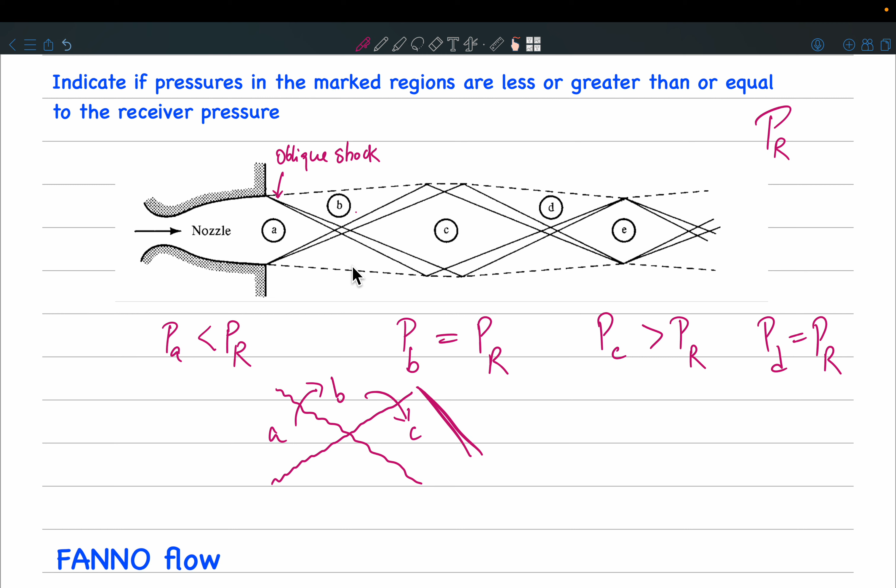The free boundary is formed by the shock wave? No, the free boundary is formed because of the shock wave, but the shock wave is not the free boundary.

So what I'm asking is, why is this free boundary created? It is because there is a certain region between this oblique shock, this region B, which has the same pressure as the receiver. So this free boundary is created because of this cascading, continuously increasing and decreasing pressures across the shocks and expansion fans.

So coming back to this question, you have these free boundaries, and another example is when you have the physical boundaries. So the question is, the waves which reflect from physical boundaries, what happens to them, and the waves which reflect from free boundaries, what happens to them? In other words, will the waves which are reflected be of the same family or different family as compared to the incident waves? Did you understand?

It can be any, right? So if the incident is a shock wave, will the reflected be a shock wave? Let's take this case first. It would reverse, right? So when I say family, oblique shock is one family, expansion fan is another family. So if an expansion fan is incident on a physical boundary, what would you expect on reflection? Another expansion fan. So here I can say it is going to be same family, and here it's going to be different family.

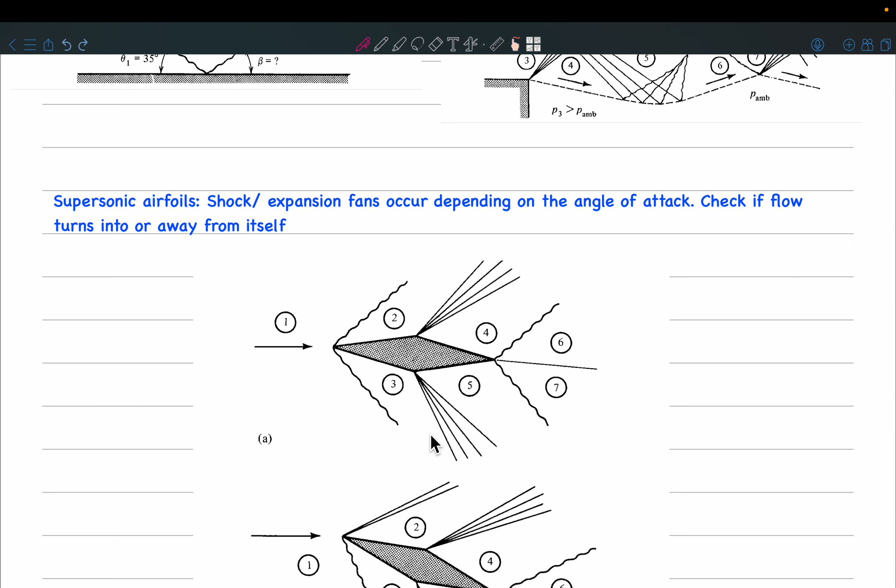Why does a free boundary establish? Did you understand this shock, and then after the shock an expansion fan is created? In this case I think this was an under expanded nozzle, so first an expansion fan is created, then shocks are created. This you can easily understand, isn't it?

But then you see that this expansion fan, it had to turn somewhere and become an oblique shock, and this is why these free boundaries are going to be created. So there will be some pressure gradients. Now it will not be here.

This is the free boundary. Across this there is no pressure gradient, but as you move from this, what is demarcated as region 4, you have this first line. Across this, now the pressure has started decreasing. The pressure at this location is lesser than the ambient pressure. Then again over here it is even lesser. So what is going to happen is that because of these pressure gradients, now the flow is going to turn.

So this reflection is happening because there is a front created. There is fluid in this region, there is fluid in this region, but a front is created - do you understand a fluid front being created?

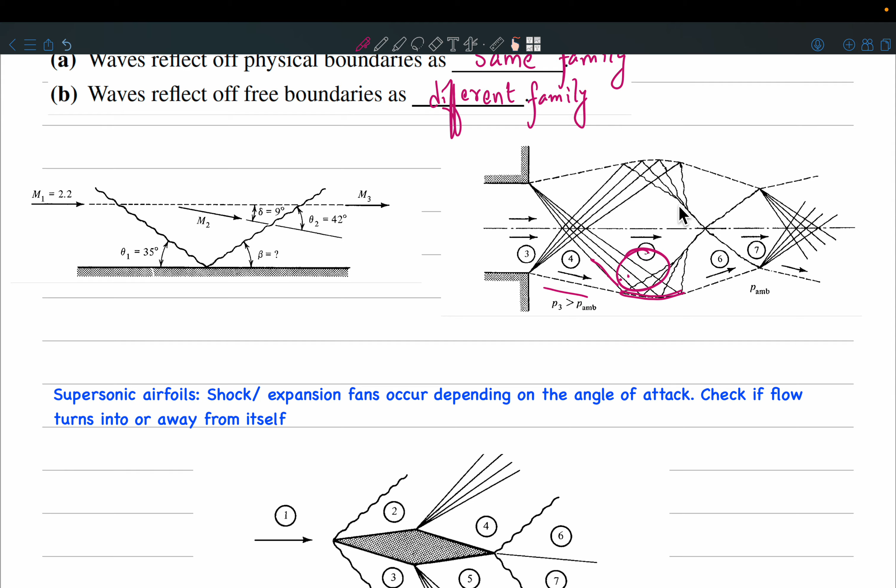Yeah, you can say that it's because of these pressure gradients that the free boundary is created. That is correct, but don't get confused that pressure gradients exist across all the free boundary. It is only in this region that the pressure gradient exists, and that is why the free boundary is created. But if I ask you the other way around, is there a pressure gradient across the free boundary always? In this region it is not.

Any other questions? No? Okay, so we'll move on to the next part.

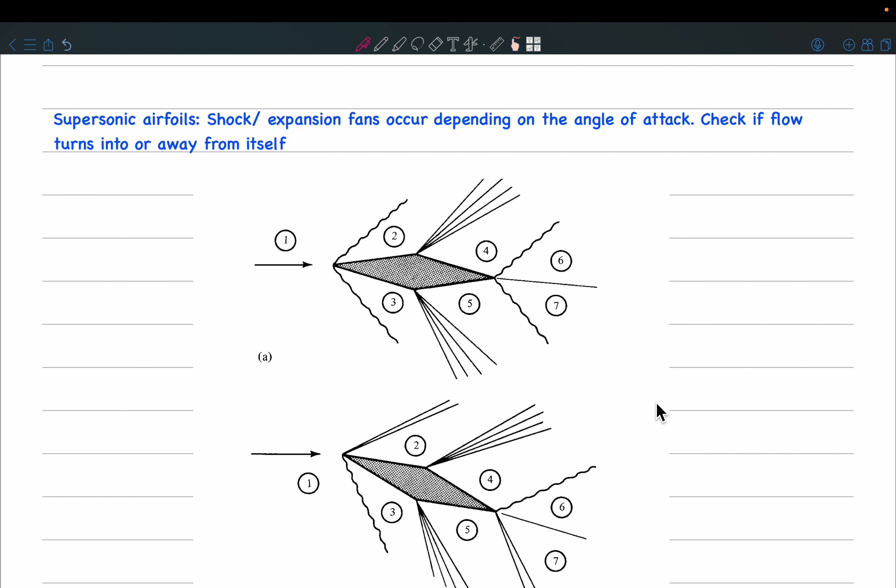So we have solved questions again in the tutorials on supersonic airfoils and also thin plates. There was just one flat plate placed at some angle of attack. Let's say it is this flat plate and the flow is horizontal. The flow is forced to turn into itself, so here we'll have an oblique shock, and here we'll have an expansion fan. And what happens here at the trailing edge?

The flow was parallel to the plate, and now let's say it moves in this direction, so it is going to have an expansion fan, and here we are going to have an oblique shock. Is this clear? Why oblique shock and expansion fan should occur at the top and bottom of the plate? This is clear, right? So you should always see whether the flow is being turned into itself or away from itself. Now I have shown you here two diagrams.

You can see in the first case, case A, you have a diamond airfoil, and in this case the angle of attack of this airfoil is very small. So what you find is that from 1 to 3 the flow is turning into itself, but even from 1 to 2 it is actually turning into itself. You can see that clearly.

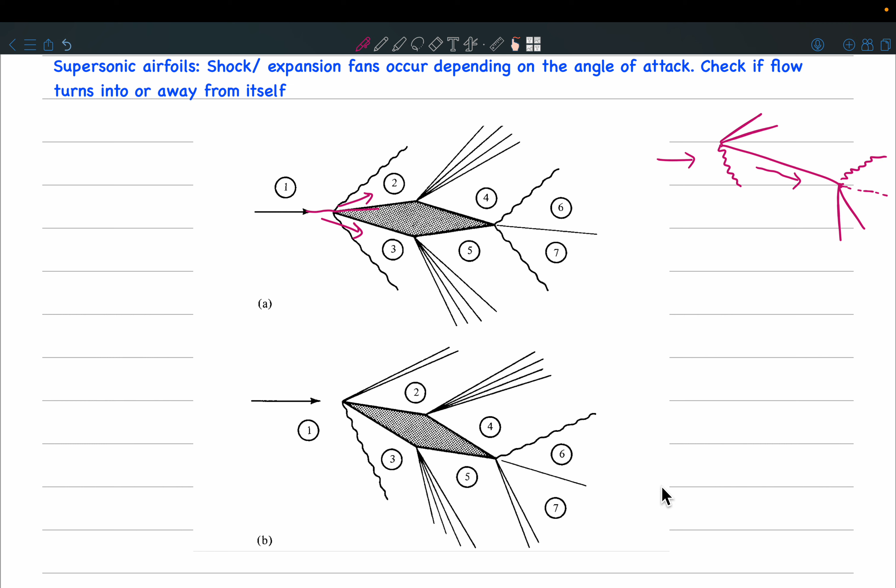Why I want to show you this is because usually the picture that is in your mind for diamond airfoils is the bottom one, because we compare it to this thin plate. Any doubts here? No? Okay, so given any of these cases you should be able to solve the questions. Again, refer to the tutorials, we have solved questions of this type.

Okay, so this we have already discussed, and the last parts are the Fanno flow and Rayleigh flow. So what is a Fanno flow? What is the assumption of Fanno flow? We have exceeded time, it's 1.5 hours.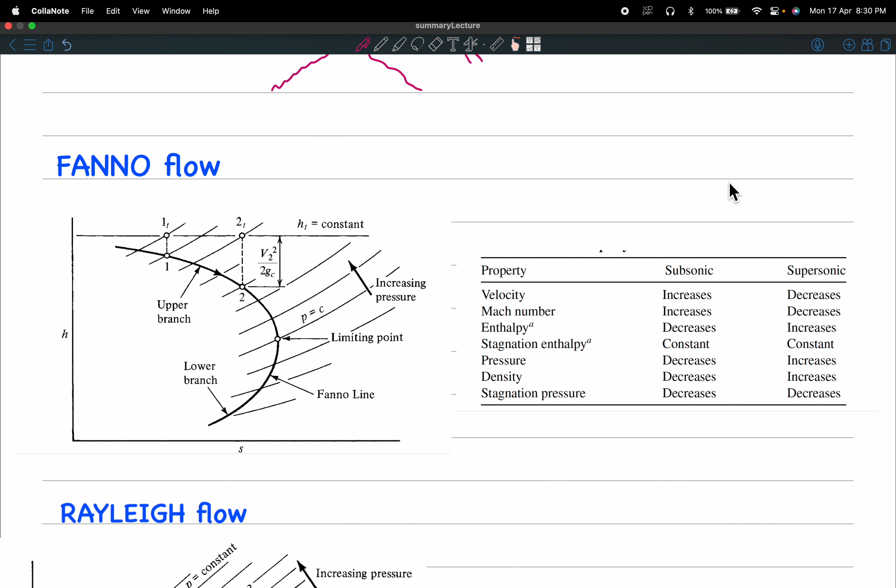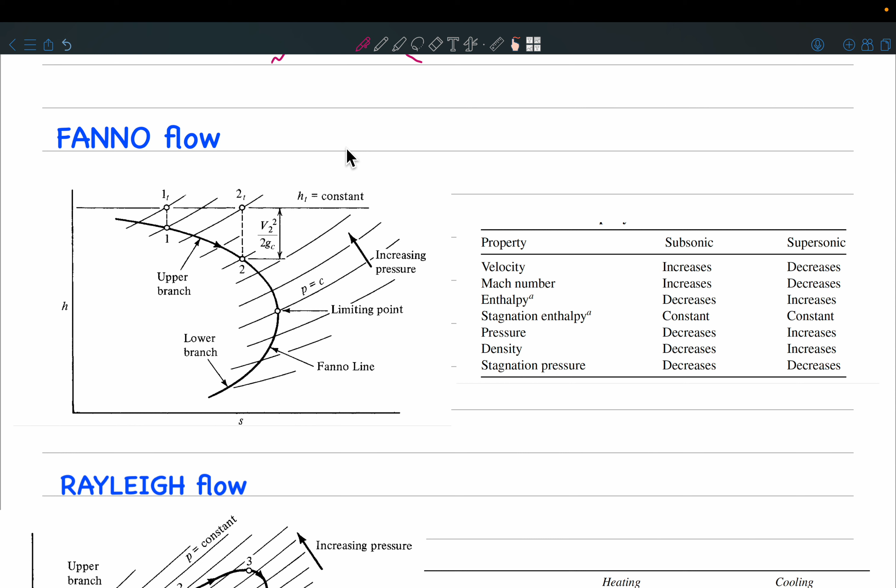Yeah, can someone answer? Sorry, please repeat. No heat transfer, okay, Q is 0. Viscous flow. So basically, we consider losses due to friction.

Alright, and then we have this HS diagram. So what is the upper branch corresponding to? Subsonic, and the lower branch corresponds to the supersonic. And what is this limiting point? Yeah, this is the sonic condition.

Okay, and how do you define a star reference for Fanno flow, or what is called the Fanno star point? Where is the Fanno star point on this HS diagram? Maximum entropy point, or which is also the limiting point, right? Yeah, so this is what I was pointing to you earlier.

We discussed the stagnation point. So from state 1 I go to 1s by isentropic process and achieve Mach 0. Another case was 1 star, where I go isentropically and achieve Mach 1. This is isentropic. There are other star reference states, which is 1 star Fanno flow, where you go by a Fanno process, allowing friction, and again you achieve Mach 1, the sonic speed.

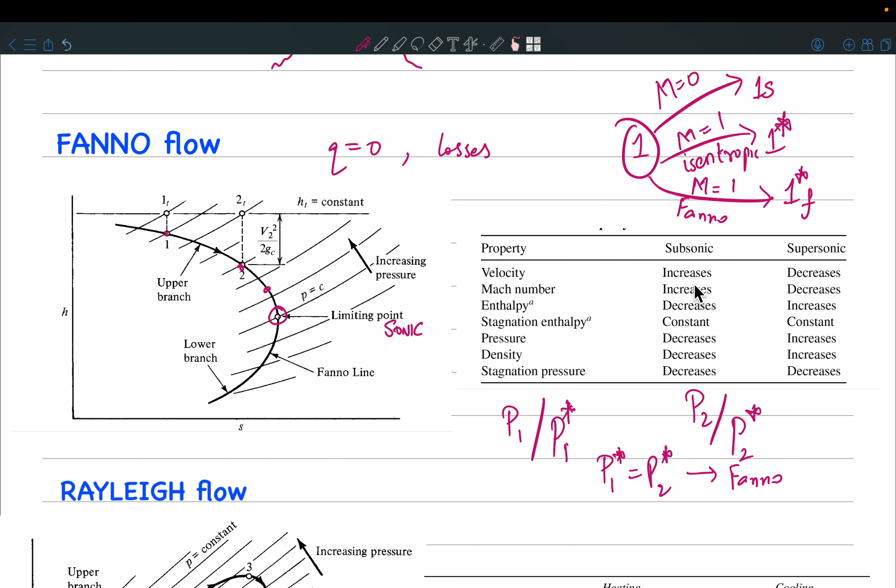What about Rayleigh flow? Rayleigh flow is where heat addition or removal in the system is allowed, but frictional losses are not allowed, right? Again here we have the upper branch, which is the subsonic branch, and the lower branch, which is the supersonic branch. So let's say we are adding heat to the system.

So you're adding heat to the system. What happens to the temperature? Let's say we have subsonic flow and we are heating, and I'm asking you what happens to the temperature. So there is heating and it's a subsonic flow, you're on the upper branch. My question is, what happens to the temperature? Will the temperature increase or decrease? Always?

First tell me till where the upper branch is defined. Is it from 1 to 3, 1 to 2, 1 to 4? What is the upper branch? Is it till 3 or till 4? Till 4. And this point 4 is the limiting point, right? It is the point of maximum entropy. What is point 3?

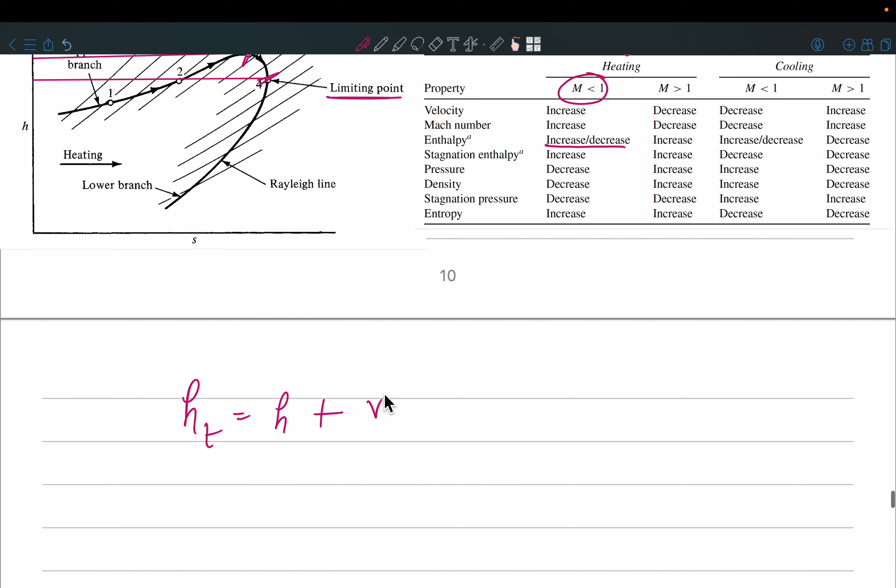This is very important. You should understand what is happening in a subsonic flow. There is a point of maximum enthalpy, but beyond that what happens? If you are adding heat, see the velocity was increasing, so whatever heat you were adding, some part of that energy went into increasing the kinetic energy. If I write down the equation, your total enthalpy is the enthalpy plus the kinetic energy, and this total enthalpy is going to increase. The stagnation enthalpy will always increase on heating. So when I add energy by heating, some amount goes into increasing the kinetic energy and the remaining amount goes into increasing the enthalpy. But then there comes a point 3, where the total energy you are adding by heating goes completely into raising the kinetic energy, so there is no rise in temperature.

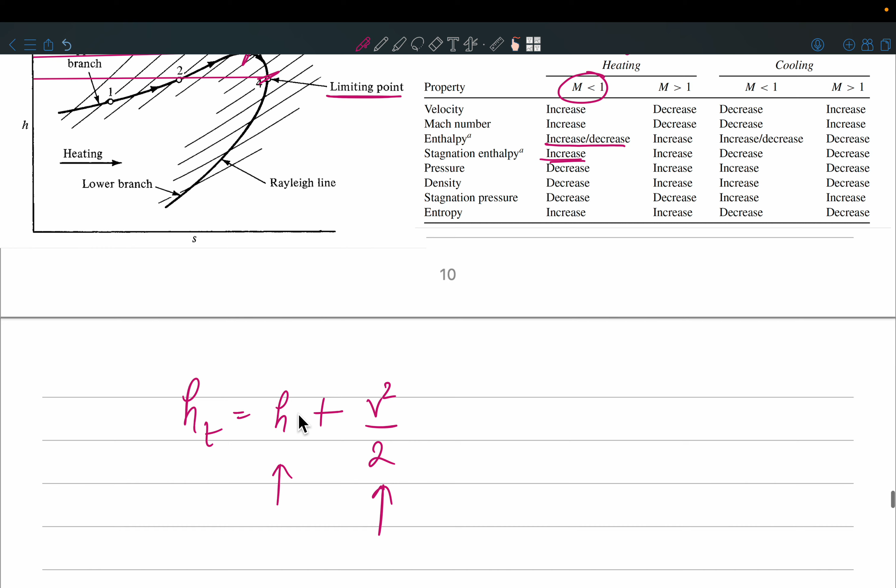And if you go beyond point 3, what happens? You are adding some energy, but now the velocity increase is much more, and hence the extra kinetic energy being added has to be retrieved from the enthalpy. So the enthalpy is going to drop. And similarly for the cooling process.

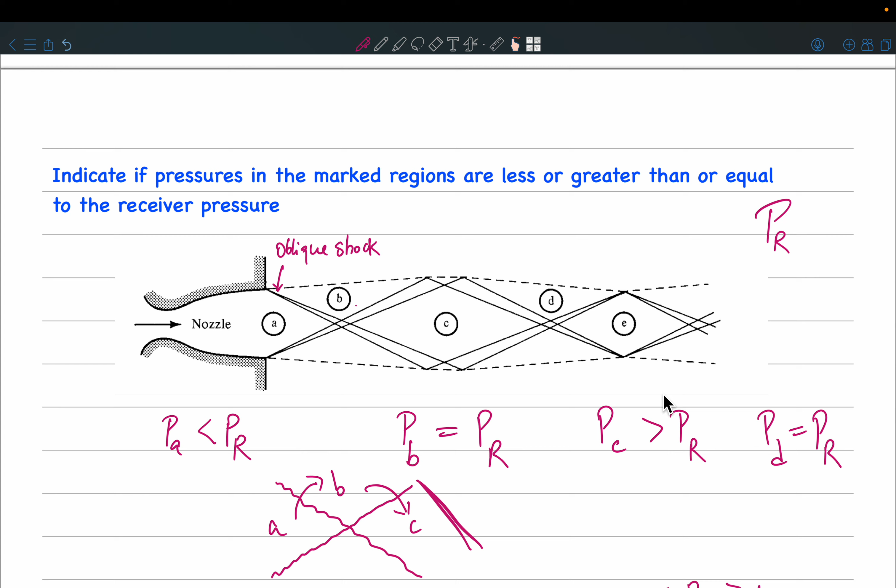That is why I was trying to make it clear that don't confuse the free boundary with pressure gradient. So there is pressure gradient. Yes, I agree. That is why this reflection is going to happen over here. But don't confuse free boundary with pressure gradient, because when you solve the flow across a free boundary, you are actually solving this region. You never solve this region.